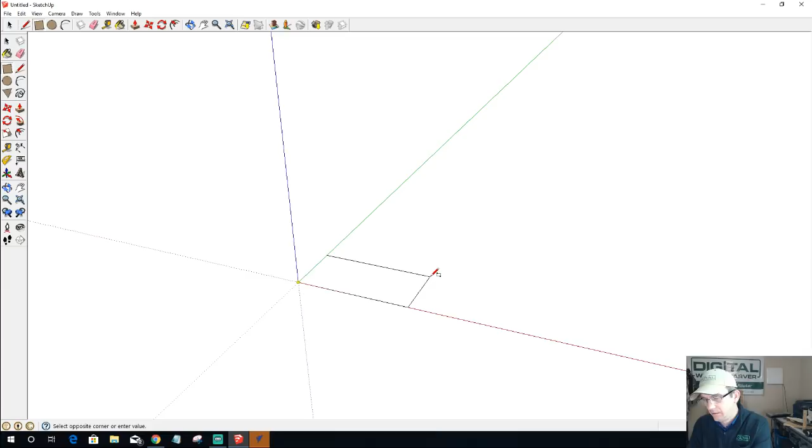So what you see on the screen is basically we've got our X, Y, and Z, our red, green, and blue planes here, and we're drawing kind of in 3-dimension. For this, our serving tray is going to be 24.5 inches by 18 1/4. Let's zoom into that and kind of get here.

Now for the bottom of the serving tray, it depends on what we're going to be doing. Normally it's going to be a thin bottom, 1/4 of an inch or something like that. But if I'm going to be V-carve inlaying in this, or inlaying period, or doing some V carving or design work, then I'm going to want a little bit of material. So I'm going to make this piece 1/2 inch thick - 0.5, enter. Then I'm going to triple click on that and make that a component. Triple click, hit enter, and that's a component now.

Now this bottom part is going to be inserted or rabbited into our sides and our end caps and everything. So let's start off real quick and kind of get the ends laid in or drawn in. I'm going to start with a rectangle here - where's my rectangle at? There it is. For that rectangle, my side piece is most likely, I'm thinking the whole thing is going to be kind of 1/2 inch, so that's going to be my go-to. I'm going to pull that out 0.5, and then pull that up - I think it's going to be 4 inches tall. I'm going to go 4 inches tall.

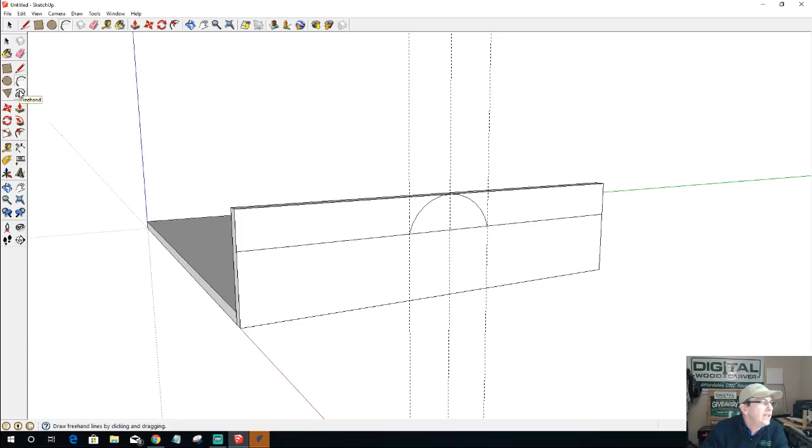Okay, now I'm going to grab my arc tool, and I'm going to make a, let's see here. I'll make a full-on arc there, and then I don't really have a kind of a Bezier curve type thing like we do in Vectric, so let's see if I can.

Let's see how good my freehand skills are. So I'm wanting to come. Whoa, my freehand skills aren't that good. We're not going to do that.

All right, so somewhere right about here, about this tangent and all, I want to have a nice subtle transition. Okay. Excellent.

And I am going to basically... That looks good. All right, yeah, that's going to be a good one there.

So let's see, I don't know why my tape measure tool is giving me a hard time today. All right, so that is 4 7/16. So let's do the same thing here. Let's go 4 7/16, and then from here down, I'm at 3/4.

So let's go ahead and draw that arc in. Let's snap right here, and just a very subtle on the tangent edge, like that. Pretty stuff. Okay, now I can go ahead and get rid of some things.

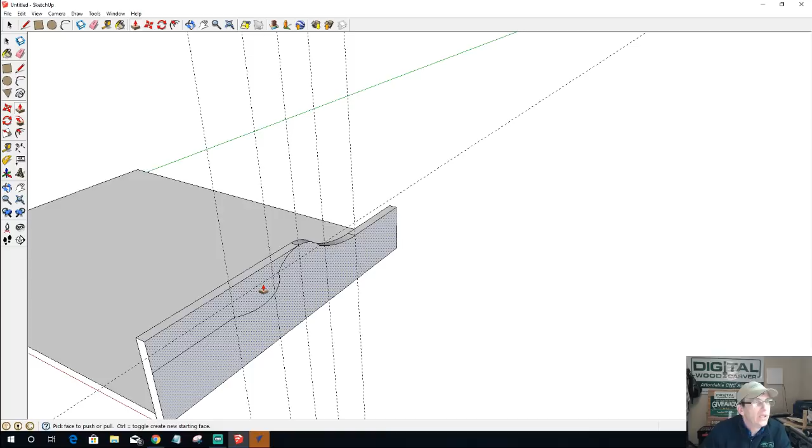Oh, Mr. Push-Pull Tool, don't mess with me now. Ooh, we're getting sexy. Anyway, why isn't my...

Stand by, I got to disconnect somewhere. 1, 2, 3. What's the deal there, Junior? That's why I have a disconnect.

My line, my arc is like way off into funky man's land. What's up with the arcs today, Laney? Why are you drawing off the board? Let me get rid of that. Jeez Louise, let me draw on my board.

Oh, wrong direction. Hold on a second. We're getting somewhere. There we go. Oh, I was just there. Where's my tangent line? Come on, get back in there.

Perfect. All right, now I can use my push-pull tool. Look at that, like a champ. Okay.

Now, let's come in here and what in the heck am I doing? All right, push-pull. Let's pop that hole through.

Let's see, if I go 0.5 enter, bam, poke a hole in there. All right, anyway, this is a rough sketch where it's gonna look much better in the actual Vectric version. I'm just kind of freehanding this right now, doing some, and let's make that a component. And let's take and move that, hold down the control key and drag that to the other side.

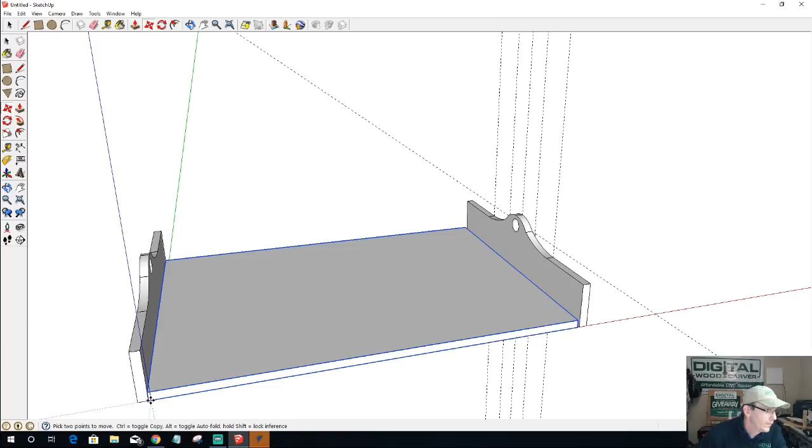Work with me there, Junior. All right, let's go ahead and get the sides on here.

Push pull that out half inch, 0.5. Triple click on that, make that a component. Then move and let's grab the outside here. Hold down the control key and snap that to there.

Okie dokie, now let's go ahead and delete my guides here. So now this has no joinery or anything right now. Right now everything's kind of butt edged up and all that stuff.

This is a typical kind of layout for design, not the handles of course and all that stuff, but this is going to be a layout for our serving tray. This is what we're going with, but we're going to do some compound miters on ours, so we have some flared edges and everything, so they kind of flare out a little bit. We're going to do some regular miters, some rabbet joints, a couple of things depending on the 3 styles.

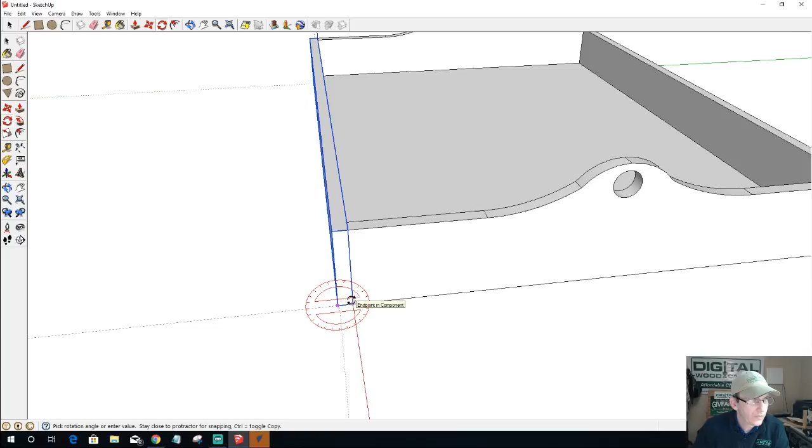What I mean by flaring out is, let's say that I take this guy here and I'm going to rotate him, kind of tilt him out a little bit. Let's go 30 degrees.

And on this old boy here, let's grab him, let's take and hide him for a second. And on this one here, let's kind of flare him out, let's rotate him out. 30 degrees.

That's fine, we'll do 2 sides for right now. So let's move this and let me kind of snap that there. Now I'm going to flip this over and go into the underside here.

We're going to break this up here and do a push pull and just kind of pull this out to here, kind of like that.

And then let's go ahead and get our other side back in. So let's unhide, unhide the last one, let's get him into position. So we'll move him.

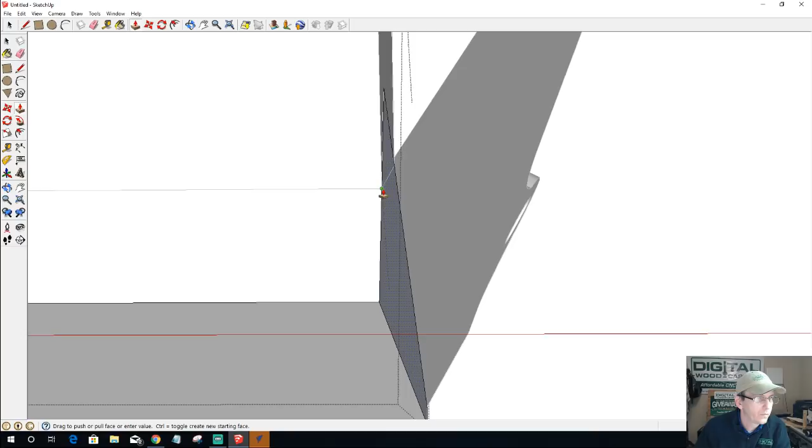This will make sense in a minute. All right, let's take this guy, pull this out. Yeah, I'm crossing these boundaries on purpose because I just don't want to, I'm lazy, I'm being lazy right now. Let's take this guy and pull this out this way.

All right, from there I'm going to take and draw a line right up the middle there, the middle. And let's go ahead and draw that line inside this component also.

All right, let's delete that. Let's delete that, delete that. All right, on this one let's delete that.

Let's take and draw a connection from here to here to here. Stand by, stand by your man. Okay, let's delete this.

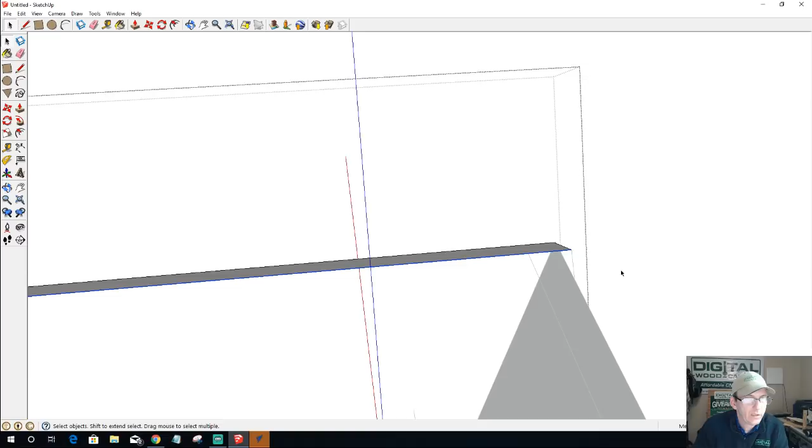Okay, oh, got one more little... That's good. Somebody that draws on SketchUp is gonna look at this and go, what in the world is he thinking? Because this is not how you do it, guys.

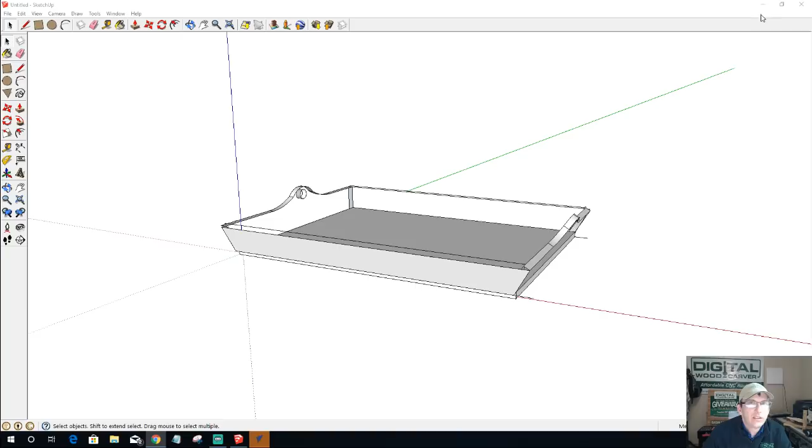All right, let's go ahead - this is not a lesson in how to draw in SketchUp, so we're going to close that. Look at there, I was successfully updated to 9.515. I recommend everybody keep their software up to date, but let's go ahead and create a new file.

Now the base of this work area is going to be 24.5 inches. And for those of you that have the 2440, you're good to go, right, if you're going to go edge to edge and all.

But keep this in mind, ladies and gentlemen, the sides - left, right, front and back - these are going to be 4 inches by 24 and a half inches or what have you. You should be able to get those and size it down within your mini carver. If you have an 18 by 24 inch cutting area, instead of a 24.5 inch serving tray, make it 22.5 or 23 inches or something, get within your size.

As far as the base, the bottom, where we're V-carving, we can kind of focus just on the area that we're carving in. You don't need that whole work area, just size it to fit your needs and your ability, not just necessarily your needs. You may want 24.5, but your CNC can only do 24, so size it for your limits, stay within your limits.

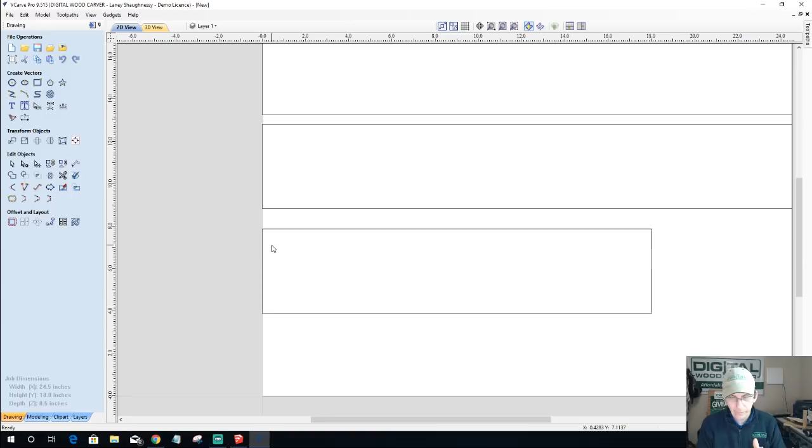Now, I said that my hand, a good comfortable hand hole for me would be about 3 3/4. So let's go ahead and draw a rectangle in here. I'm going to go 3 3/4, 3.75.

And on the thickness, let's see here. What's a good... we'll go 1 and 3. Oh gosh, what? Let's see here. Let's go 1.5. There we go, that'll be good.

All right, so I want to get this little guy - I'm going to have him selected first. I'm going to have the outer rectangle selected last. Go into the alignment tool, the last icon on the transform objects menu, and we're going to align to a selection. A selection means the last object that we selected.

So I'm going to align to a selection, I'm going to center - okay, but not full center, just left and right. I want the handle to be somewhat in this general position here, but centered left to right. So we had a small shift there, now we're centered. Now I'm actually going to go back in there and center it to the inside top edge like that, and then move it down.

I'd like it to be positioned - I'm going to use the move tool with just this selected. And I'd like to relatively move it from its current position down. Up and down is the y-axis, so I want to go negative because we're going down. I'd like to have a good 5/8 or 3/4 inch bit of meat above it. So let's go 0.625, we'll go 5/8.

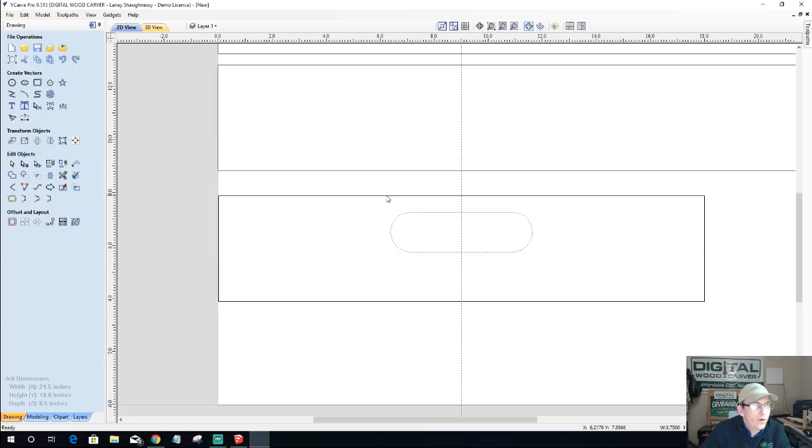And for this, I'm going to have a nice... what do I want to do? I think I'm going to drag a guideline and snap to the center here. From the center to the top, I'm going to have it come all the way out past my handle, maybe about a half inch, before it starts to round off and come down.

So let's drag another guideline. I like using guidelines to help me lay things out. I'm pulling a guideline from the ruler over here, and now I'm going to make a relative guide. Right click on your guide, hover your mouse over it and right click, and your menu comes up.

I'm going to the left, which is a negative direction on the X. I want to go from that edge maybe about a half inch, but I think 5/8 is going to be good, to keep everything consistent. So I'm going to go negative 0.625. Okay, same thing over here, but this time relatively I'm going positive, to the right.

All right, so now I kind of like this arc to be about the same height as the top of my handle hold here. So what I'm most likely going to do is draw a rectangle. I like working from rectangles.

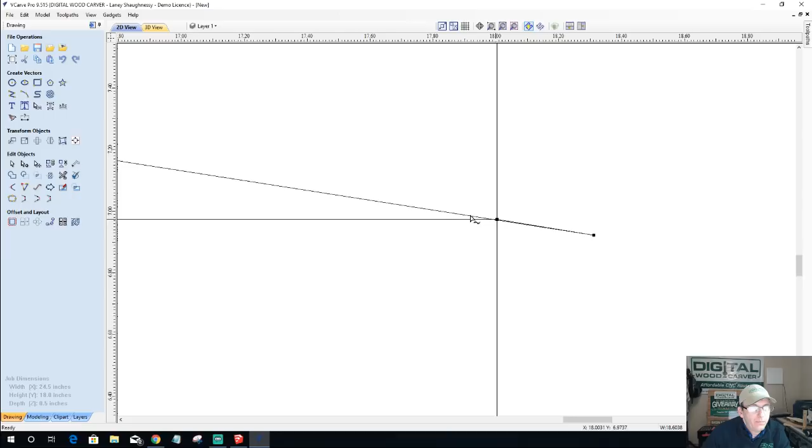This is going to come down. And I went out beyond - I'm crossing over because we're going to end up deleting this. This will make all kinds of sense in a moment. I'm pulling this node out away so that my line can intersect my cross there, because I'm going to end up deleting those points in a moment.

Does that look level and even, right? All right, now let's clean this up. Take my scissor tool and trim that away over there. Take my scissors and trim that away over here.

Okay, now I want these to match. I'd like to have this curvature match, because this line's not going to be here in about 2 seconds - we're going to get rid of this bottom span here in a second.

But first and foremost, on this sharp point right here where I'm kind of coming down, I'm going to fillet. Let's do a fillet, and I'd like a nice large fillet. I'm going to go about 1 1/4. Let's see what a 1 1/4 fillet looks like. You know, kind of like that. That's what a 1 1/4 looks like.

Let's go bigger, go bigger, go home. Let's double that. Let's go 3. Nice transition. All right, let's go over here.

Okay, nice. All right, let's do some trimming. And I'm going to smooth this out too, by the way, up here. We're going to make that a nice little arc here in a moment, but let's do some trimming.

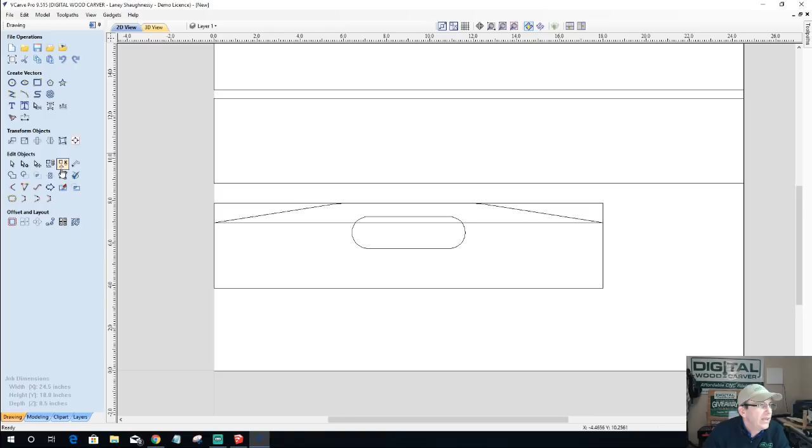Let me get rid of my guides because that's probably driving you nuts, those guidelines. So delete all guides, I don't need them anymore. And let's do some trim - we're going to get rid of that. And on this part here, let's go back into node editing mode.

And on this part here, I'm going to go with an arc, and pull that arc ever so... oh, do I want to go with an arc?

I really do want to go with an arc, but not like that. Let's undo that. I'm going to take these two guys out right here and lower them down. And look what I just discovered - there's a line there. I knew there was something funky going on. Let's trim that up, get rid of that line. Now I'm going to go into node editing because something wasn't right - I knew my nodes for my radiuses weren't there, and I was like, something's going on.

Now let's go, I'm going to select all these and lower them down just a little bit, a little bit softer now. Now I'm going to turn this into an arc - whoa, big old arc, not that big. And we're going to transition to right about here. I want that arc to actually go wider, so I'm going to delete this point and this one as well, and pull that up just ever so slightly.

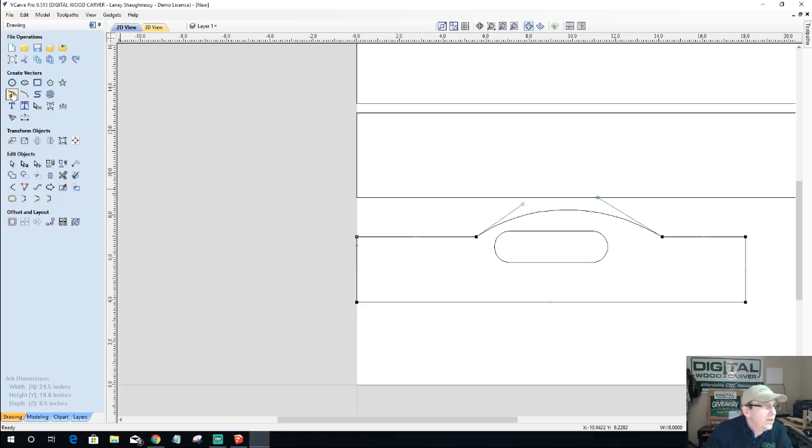Okay, watch me get my center line. Now I got a center line. Grab that center line and snap up to here. What that does for me is, as I'm pulling this where I want and everything, because I want this kind of transition, I can get this center line, and that's going to let me go ahead and trim. And then that's going to let me select this guy right here and mirror him under the Transform Objects menu.

Flip him about job center - no, not about job center, oh I want to just flip him. I want to create a mirror copy and flip him, not vertically, you goofball, horizontally. Nope, not that way either. Flip to the left. Not horizontal, I want to flip them to the left. To the left, to the left.

Okay, now with that we can go ahead and click, click, trim. Click, click, trim. Click, click - oh not that one, zoom in. Click, click, click. Oh man, don't be doing that to me.

When it wants to trim away everything, and no matter how much you try, go back into node editing mode. We'll select these two here, and we're just going to bump them. Where's my lines at?

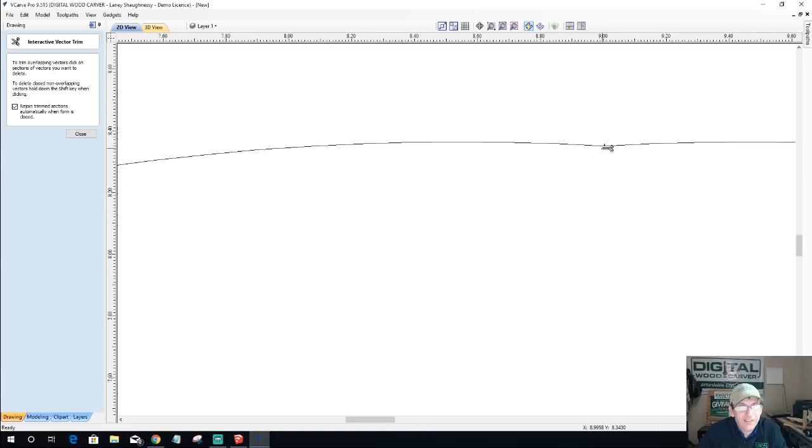Okay, let's go into node editing one more time. Let's click on this - got a little bit of a crisscross happening here. Let's delete that point. And what do we got going on here? Let's delete this node, or that point, sorry. Delete that point, and let's see what that ends up with. There we go, so now I gotta pull this back up after all of that.

After all that mirroring and everything. Oh, pick a side. Let me get one side looking sexy.

Okay, I'm happy with it. We're wasting too much time on that. All right, so with that, that's what my end is going to look like, my handle and everything.

We're not done with that, that's just the first draft. We're going to add some decorative cutouts all the way around on some of these. So first I want to select this, hit Control, and make a copy so we've got our left and right handles.

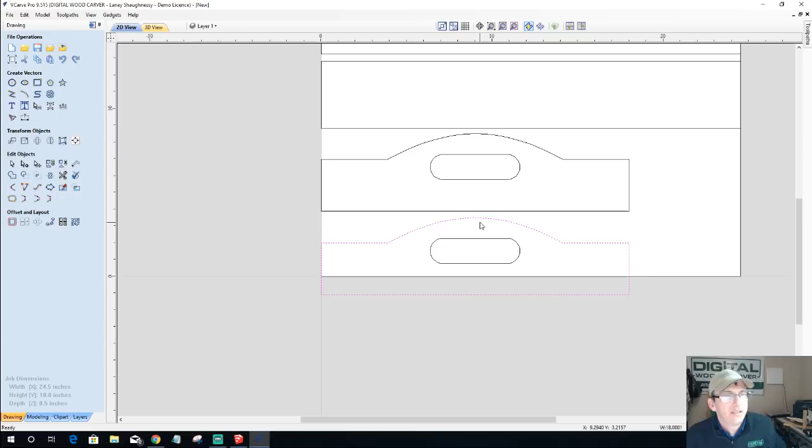Okay, man, all that roundabout stuff just to get a halfway decent looking arch going on there. You just don't want it too thick here, so when you're gripping it with your hands it's not uncomfortable. You want it comfortable, and whatever that comfort level is.

I just bumped it up too. Okay. Now on here, you know, I said in the video description this was going to be a two-sided job.

Here's your choices. One, you can cut the parts out on your CNC, then take them over to a miter saw or table saw and miter cut the ends for a nice mitered corner. You could add miter splines, maybe if I was doing this in a walnut serving tray, I might have maple splines on those miters, because the CNC doesn't take away good old-fashioned sanding and joinery. It's just another tool, so not every single detail has to be done here on the CNC. For me, especially on that compound miter, that would be done on the table saw after cutting the parts out.

So we can miter the edges, or we can do just basic rabbet joints, right? Kind of have the side, the front and back, these two parts here, go right into some rabbets on the side. But whatever you do, just understand you're going to have exposed end grain, and that might be a nice little detail for you. Me personally, I want it closed off, that's why I like the miter look.

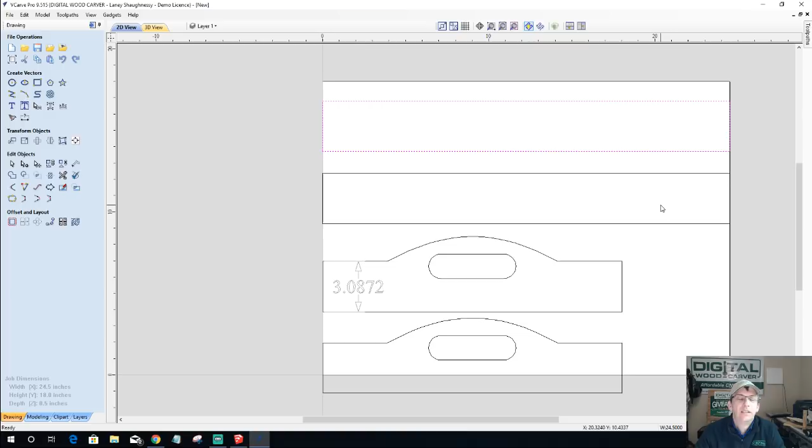Let's use other tools if that's the only way you can go. I will show you how to do that in just a moment. I'm only going to show you one miter - you'll have to do the others. I'm not going to do all 4 sides.

So on these end handles and everything, I would like a nice little detailed V carving, kind of like a little flourish or something, and I would like that to continue all the way around to the side. So we're going to decorate the outside of this first serving tray. From there we're going to change things up and do some decorative stuff on the bottom and all that.

But let's look and see what I've got as far as flourishes and things, if anything I have will fit my needs. Let's take - oh, that one might be a good one. I don't know what that is looking at it right there, but that could be a good one. Got some stuff going on right here. Let's do this one - this one looks floral-y.

So we're going to import a bitmap for tracing.

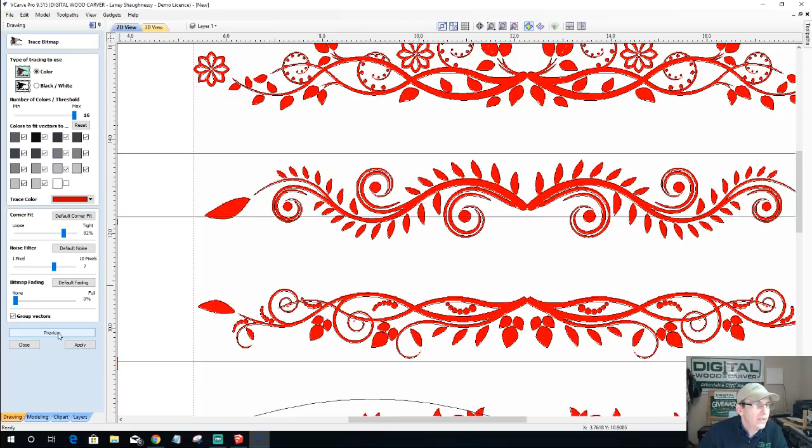But since it's not the best quality image in the world, I do want to crank up my noise filter a bit. I'm going to go probably about 7 on this and preview. There we go. Actually, I can't do that - I've got to turn it down because it's actually skipping some stuff because of the noise. So let's try that again.

Yeah, I'm going back up to 7. I've decided - we're going to go back up to 7, and I'm just not going to trace that. Doesn't need that, don't need that junk in there anyway. All right, we're going to click apply.

Close that tool. We're going to come over here and turn off our bitmap layer. In the layers tab, we have our bitmap layer where our pixeled image is - we're going to turn that light bulb off.

Now we're going to pick one. I'm going to go with these kind of tulip looking flowers right here. So all the rest of these, I'm going to go ahead and ungroup those, select all of these and hit delete. I'm going to select all of this and hit delete. I'm going to select this and group this together.

Oops, let me not select my - ungroup that, my handle was in there. Don't group your handle in there. Let's turn that off and now we'll group that together. By the way, your group tools are under Edit Objects, the 4th and 5th icon, group and ungroup - but also the letter G for group and the letter U for ungroup on your keyboard.

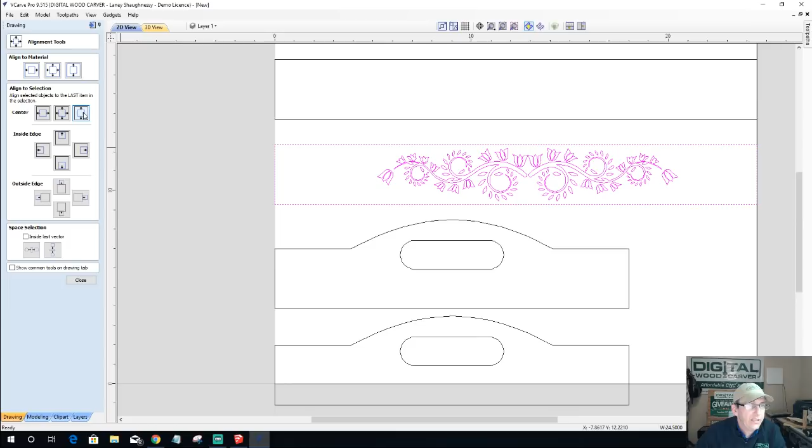I want a little bit of scale there, just not much. I want to leave a little bit of room at the top and the bottom, and I want to make sure it's centered. So I'm going to hold down my shift key, grab that rectangle last, go into my alignment tool, and make sure it's centered up and down. Okay, so it didn't move, so its position is centered and everything.

Now I'm going to turn off that rectangle, and I'm going to use my left arrow key and kind of come in and pick a spot, any spot. But I'm going to be cutting half of this off because I want this to kind of wrap around.

This is very important if I'm going to do this right - when I glue this joint together, I want my flowers to all line up the same. If I know I'm going to be trimming just a hair off when I miter cut this piece, then wherever I want to join, I'm going to overhang it a bit and pick a spot, and that's where I'll bring the other one to. It's hard to explain, but I want this to wrap and be seamless.

So real quick, I'm going to double click on this, hold my control key down, and drag a copy over. Now between the two copies, I want to get my spacing here, and then I'm going to center everything, but I want to get the spacing between these two flowers. These are going to kind of be the center.

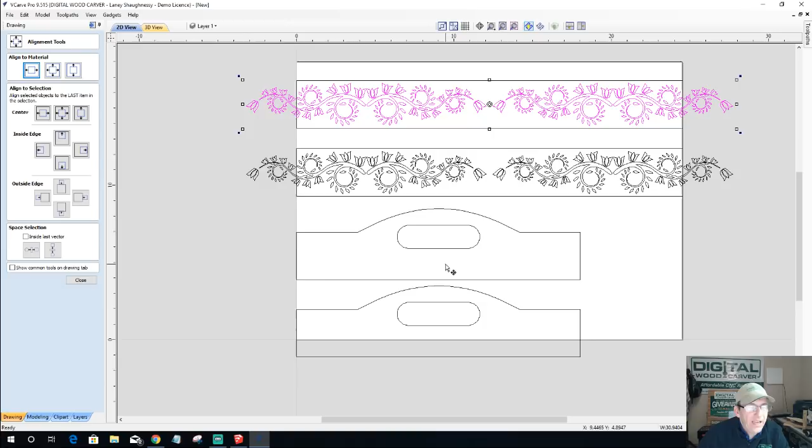On this end, I might have, I don't know, an initial, a monogram, my business logo or something, or 'for more serving trays, call me.' I don't know, but...

This is where I'm going to be drawing the line right here. Now, when I say draw the line, I'm going to be trimming this vector, and I do not want an open vector. I'm going to be cutting this off, and I don't want an open vector. So I would like to very simply trim it to a line, but I don't want to trim my rectangle away - that's not my intent.

So what I'm going to do is make a copy of this to a new layer. This is going to be my flourish trim boundary. You don't have to name it, but I'm spelling it out so you know what it is. And what the heck, we'll make it red.

Okay, now I'm going to take my flourish trim here and here. Might as well do the same thing with this - let's copy this to that same layer, copy to that same layer.

All right, now I'm going to take my 4 flourishes - hold down your shift key when you're selecting more than one item - and I'm going to move them over, move them over to there. That way I can turn off layer 1, and all I have is my flourish trim boundary. Make sure you select on it, and these guys now can get trimmed.

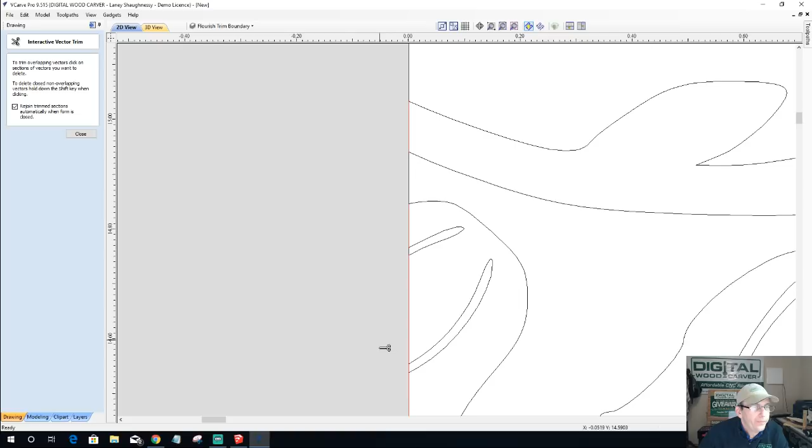This one too, trim. All right. And then over here, we're going to trim that away. Slip slide it away. Right between here, we're going to trim that away. Right in between here, we're going to trim that away. And in between this one, we're going to trim that one away. All right, down here, we're going to trim that away. All right, we're golden.

Okay, sexy. All right, over here, same thing. Let's go ahead and select what we don't need. Oops. Ungroup, got to ungroup it, got to break it up. Select what we don't need here, and this one too. Hit delete. Scissor tool, trim this away. Come on in here and trim. And then right in between, we're going to trim this bottom piece away. Right in the center there. Out here, and on the other side of that stem.

Close that tool. All right, so now what we've done essentially is I can take this here and I can, let's make sure, who left layer 1 on? Turn layer 1 on.

Stand by. Stand by your man.

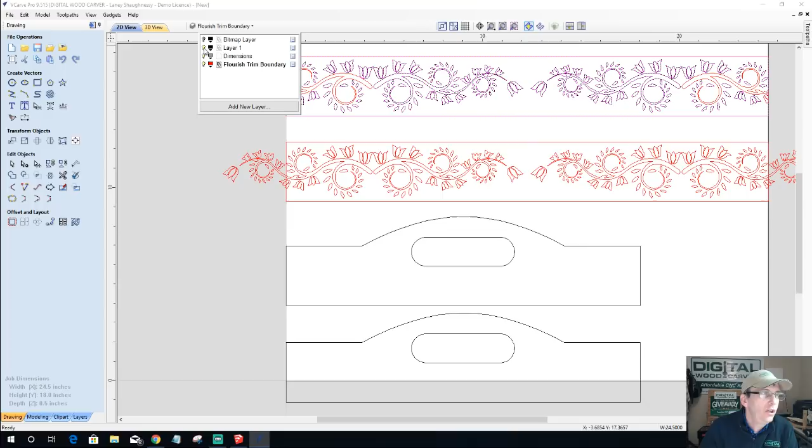Everything that's black here right now, I got to select all of this because some goofball did not have the correct layers on. So I got to turn this off and this off, the red ones, right? The things that were red, that and that. And all of this stuff here, I got to make a copy back to my flourish trim boundary. Then I got to come up here and turn layer 1 off. Dadgummit. Everything should be red. There we go. All right.

So now I can delete this. And I can delete that. Delete that. And I swear if I turn this back on and that rectangle's gone, okay, I was about to say, I was about to get mad. I was like, if that rectangle is gone, I'm going to kick something's butt.

All right, so now I've got my, if I right click on this and select all open vectors, I have none. I do not want any open vectors, that's the goal. Okay, so now this, now that it's trimmed, right, it can go back, it can move back to layer 1 where it belongs. Bam, done.

Okay, all right, same thing here. Let's get this a rocking and a cranking here. Let's go ahead and ungroup it. Let's go with our scissors here. Before we go with our scissors, let's select anything that's on the outside of the boundary that can be selected and delete. Now let's do the same on the other side. That way we're not opening and closing your tools.

Ungroup. Select. We don't want to keep opening and closing tools. We want to try to be proficient. And when we have a tool open, use it, use it everywhere you need to use it.

And we can trim this away. Zoom in. Trim that away. Trim that away. Trim here and above that. Done and done. Come on over to the other side.

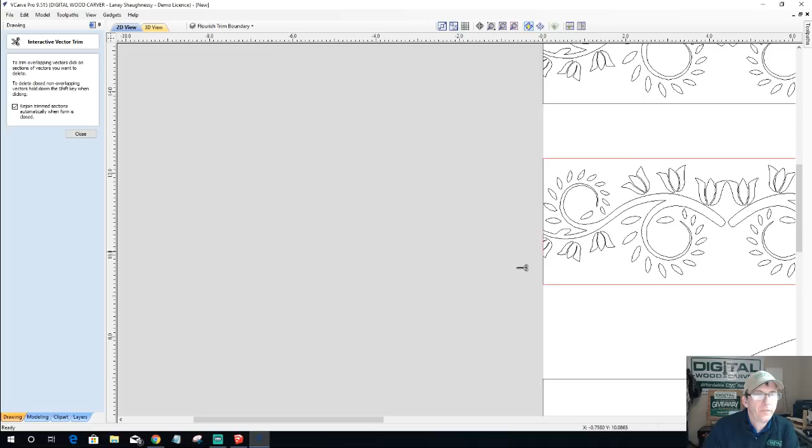Okay, we're going to get rid of this and this. All right, what do we got going on here? We're still good there. All right, so dadgum. Do I have layer 1 on? Layer 1's confusing me right now because it shouldn't be active and all that stuff, but that's okay.

We can turn it off, and these two guys right here, they're cleaned up, no open vectors, right? Select all open vectors. None, they're closed. So we're just going to move them back over. Move to layer 1. All right, so I have nothing left on that flourish trim boundary.

I'm going to go ahead and delete it. I have nothing on my dimensions. Delete it. Turn my layer 1 back on, and there's my two end pieces. Okay, and these guys here, I'm going to go ahead and select them and group them together, right? There's no sense, I should have two items here, my border and the area that I'm going to be V-carving.

So select these and group together. All right, now I want, when these end parts come into here, right, I'd like them to somewhat line up, right? So if I took this guy right here and I grouped him together as one, and this one here as well, and I grouped him together as one, if I took and put them in transform mode and I grab this and snap to there, right? Grab this one and snap to there.

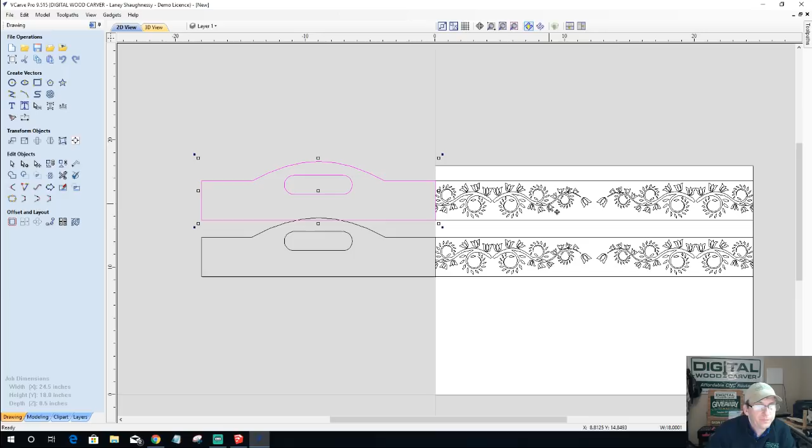I'd like this to take somewhat of that shape, that transitional shape. Now, because everything on the left is on the right, and on the right is on the left, let's go ahead and...

Ungroup this. And once again, I'm working in a different layer, not my original layer, because I'm going to be doing this on both sides. I'm trying to get it to somewhat match. It doesn't have to be perfect because they're not going to be looking at the end and the side at the same time, but hey, let's do what we can.

So we're going to go ahead and make a layer, and this is going to be my side flourishes layer, I'll just call it that. And I want to take my left and right, and I might as well take them all.

And I'm going to copy them - not copy, copy to layer down here. Boy, it's been a long day. I'm going to copy them to that side flourish layer. Now, if I turn layer 1 off, I should have all my flourishes.

Excellent. Now I need to take these two and move them over there to that layer. And turn layer 1 off for a minute, so I should have everything over here.

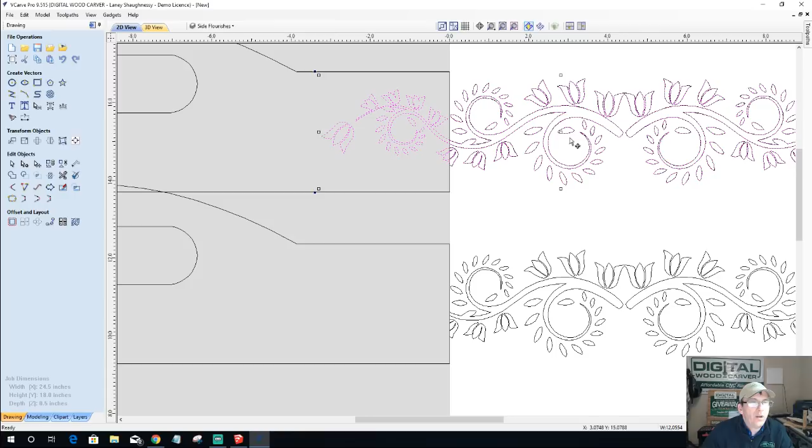All right, now this is about as far as I'm going to go into here. I could, if I wanted to, bring it over more or what have you, but no, that's it. I want it to just barely wrap around. I don't want anything in the middle area here. I just want it to kind of just wrap around, you know what I mean? Just like the vine is just kind of wrapping the sides.

Now I'm going to be trimming and mitering this. And when I go to miter cut this, I'm going to do my best not to shave off too much here on both sides, both pieces. And I am going to lose some, right? I am going to lose some. I might end up losing a little more over here. It's not going to be exactly a perfect cut.

Now, I can account for that by bumping this over ever so much. And then when that area gets cut off, then it's going to end up perfectly where it needs to be for this side. And the same thing over here - I could bump all of this over a little bit, however you want to do it. But I don't want to make this too complicated for you because you're going to take and do whatever design you want to do. But this is what I want right here. This is my go-to.

So with that, we're going to do some trimming. So we're going to first of all deselect everything and only select what's outside of the boundary here and hit delete. This guy right here, he can be deleted, we don't need him. And that, what does that leave me? That only leaves me a few things to clean up over here.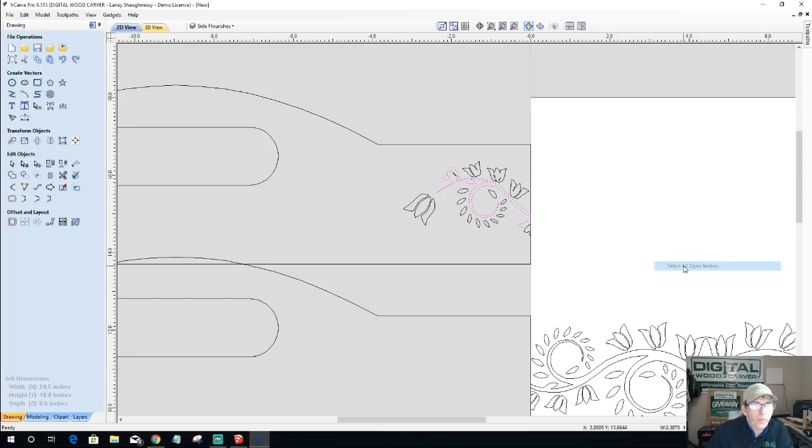But you can't tell that, it's done. So now this guy right here, right? Do I have any open vectors? Select all open vectors. All right, so I still have one open vector, and that's because I didn't trim this line right here, that little space there.

So let's get rid of him. Bam, not all of him, just him. Oh, come on now. All right, when it wants to do that, just go into node editing mode, right? And that's a span between two node points. Bam, delete the span. Okay?

All right, so now that should, let's go over here and let's make sure that we are joined together. That's what our join tool is. So there's still two open vectors, okay? And it's not letting me join. See that? There's no join button here.

So what that means is we're going to take and we're going to move this back to layer 1 for a moment. That way I can see clearly. Right there. When I trimmed, I got rid of the whole line, right?

So I'm going to take this, join with a straight line, close it off. I'm going to take this, join with a straight line, close it off. I should have no open vectors. Okay? So if I go selection, select all open vectors, there should be none. All right, same thing down here.

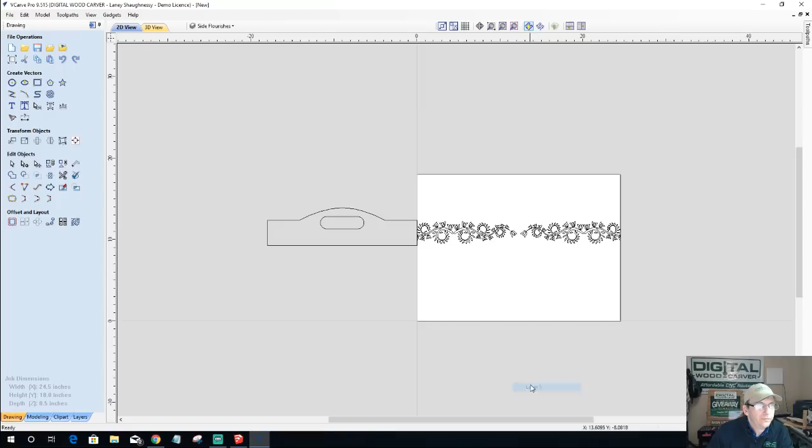And this guy now, he can be moved back to layer 1. Get rid of them. I'm only using this side flourish layer just to help me lay out all of my stuff. So ungroup. Why do these layers keep coming back?

I don't know if I've got a setting to... all right, that one should be done.

This one, I'm going to actually, instead of using the ungroup, I'm going to go ungroup onto groups layer, right now. Not the original layer, groups layer. This layer right here. Okay. That is a big key thing because it was becoming a pain in the butt.

So groups layer means the layer that it's on. The active layer that it's on, that's what we're ungrouping to. And using just the ungroup tool, it was putting it back on the original layer, which was causing us a little bit of a headache.

All right, so let's get this somewhat into position. Again, these are copies, that's why it's identical.

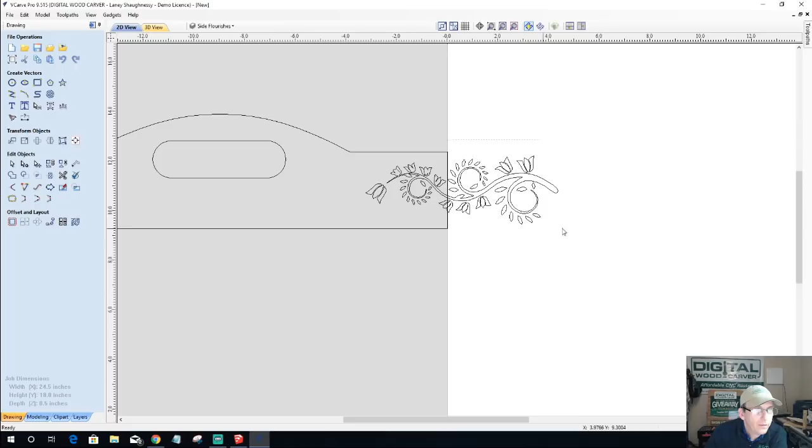Don't give me no sass. All right, I got another object below here. Bear with me a moment. We don't need all that. Don't need all of that. Okay. Trim. Get rid of that.

Get rid of that, that, and that. Now, down here, trim this away. Gone. You can't tell it's gone yet, but it is. Over here, trim.

Here, one click. Here, one click. Up here, one click. All right, so that should have taken this guy right here, and it should have closed him off all the way around, and I should have no open vectors.

Okay, excellent. So now these two guys right here can get moved back to layer 1. I can get rid of this side flourish layer. I'm only using the layers to help me create things.

And now these two parts here, I'll go ahead and group them together for right now, just for a moment. They're going to be ungrouped here in a second. But let's take this one, group all that together, group that together for a minute, and I'm going to just kind of move these up.

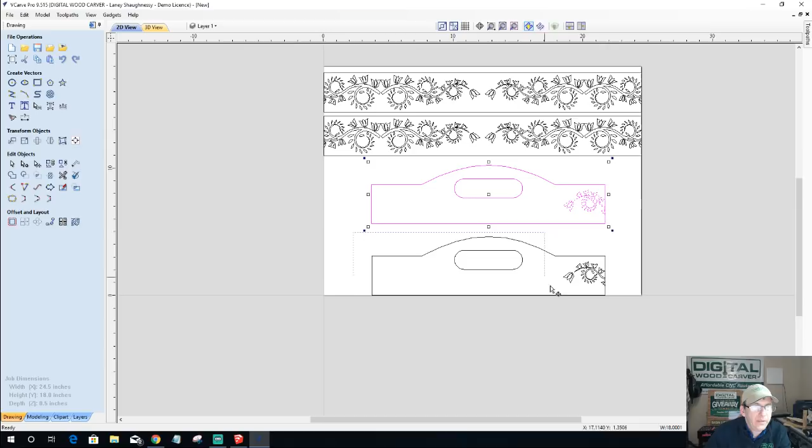And let me take this one. Move that up. Let me take this one. Move that up.

Okay. I am 100% confident that that is, you know, the same on this side, so I'm not going to go through that whole process again. I'm just simply going to take and I'm going to draw a line. I'm going to find the center. Find the center. 90 degrees down.

These two should be centered. If I grab this one and this one... oh, you son of a gun. Group that together, select this and group this together. If I take and select both of these and use my alignment tool and align them side to side, they're even. So that should be my center on both.

Now what I'm going to do very simply is this: I'm going to take and select these two items, group them together, and select that line. Then I'm going to open up my mirror tool and make a mirrored copy and flip it about that line.

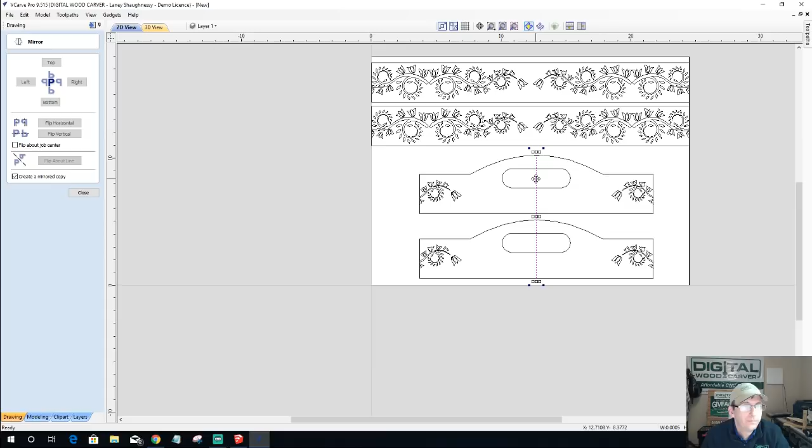All right, so this is going to be my first serving tray, this is going to be the front half. Now you have something to consider, because these do not need to be cut out of a frigging 18-inch wide board, right? We don't have to go try to find some kind of special customized 18-inch board. They're going to most likely get cut out of a...

Let's see what the height of it is. So this one has got a height of 6.5 inches. This here has got a height of 9 5/8, a little over 9 5/8. But let's take this off - that's 18 inches, I've got 24. I'm trying to make it where I don't have to do any tiling and all that stuff. But yeah, we're good - 1 by 12, whatever it may be.

But again, I can select this, let's group. Why are you not selecting? Stand by. Ungroup, ungroup. That's one group right there. I'm grouping these all separately now. These guys here are grouped together, those are grouped together.

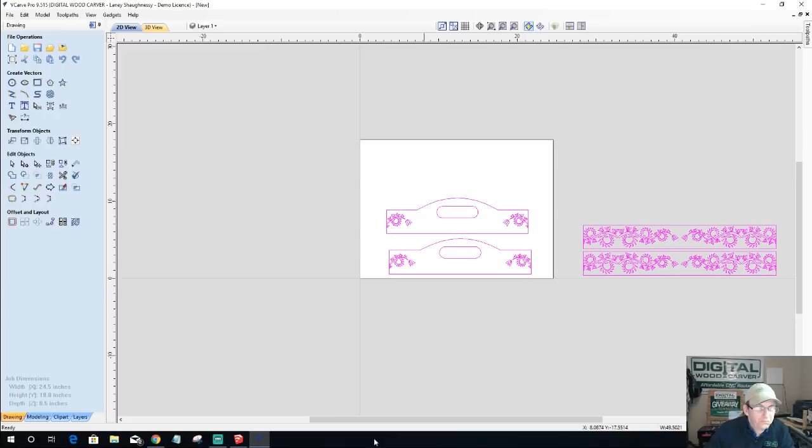But we are going to - I'm going to come in and change my job size up in a moment, but let's take this and this, and let's copy this. I'm going to right click on my Vectric and open up a second instance, and then go into create a new file. This is going to be the board that I'm cutting things out of.

So most likely, if you have a 24-inch cutting area on your mini carver, stay within your cutting area. I have a 40-inch cutting area on my 2440, so I'm most likely going to cut this out of a 36-inch board or something like that. As far as the width, I'll probably take a 1 by 6, which would be 5.5 or 5 1/4 - I think it's 5.25. Somebody let me know if they know off the top of their head.

Now, this board is going to be 1/2 inch thick material, right? So I'm going to be planing it down. If I can't find the material already 1/2 inch thick, then I'm going to mill some of it off. Or I'm going to decide - do I want thicker walls on my serving tray and keep it at 3/4? But I'm going 1/2 inch, so that's what we're doing.

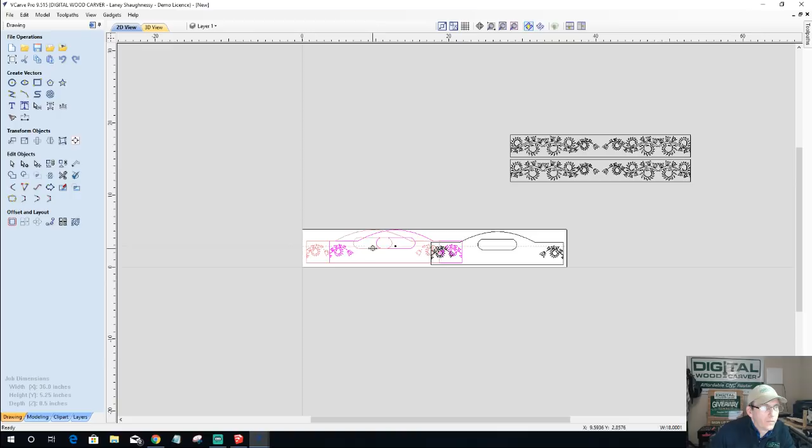Wherever you want to put them, that's all that. Now this is where you got to decide: is this going to be a one-sided job? How are you going to do your joints? Are you miter cutting them? Are you going to do rabbets? What have you? If this was a two-sided job, I'd carve my V-carve on one side, then flip it over and do my rabbet or whatever joint on the back side.

That's a simple pocket cut with a rectangle and stuff. I'm going to be mitering, so remember I told you I'd show you how to do a miter on a part like this, and I'll do that in just 2 seconds. But first and foremost, we're going to make this layer 1.

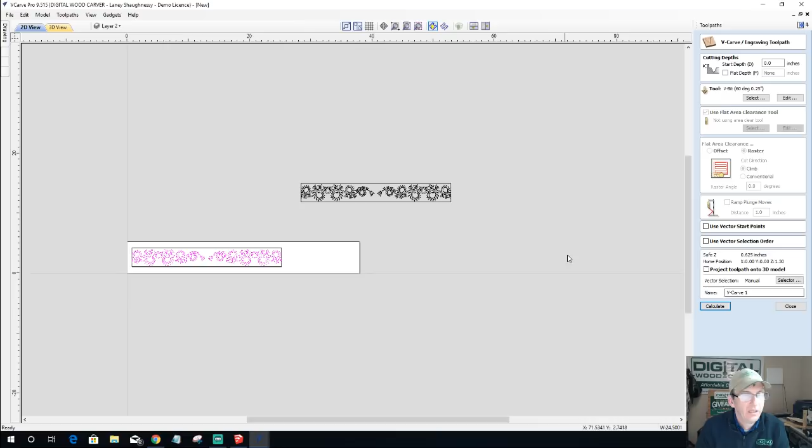All right, let's do a V-carve. I'm going to use a 60 degree. Something like this, 60 degree will probably do okay, but because it is small, a 22.5 degree would probably be a nice bit. I may have to, with it only being 1/2 inch thick, if I use a 22, I'd most likely have to put a flat depth in there. With the 60 degree and this small stuff, I shouldn't have to do that at all.

Now, there's duplicate vectors — they're being ignored. What that means is, if I ungroup this... I don't know why I'm up here. Don't do what I just did. And what I just did was I ungrouped this.

Turn that layer 1 off. Oh, you son of a... Move this back to layer 2. Always make sure your layer is active when you're working in it, man. That's my biggest thing that I do — I always forget sometimes, and it throws me off.

All right, calculate this — this is going to be left side, right side, or front, back. Now you see those duplicate vectors. What that's saying is that within my design, I have vectors on top of vectors, identical duplicates. We don't want duplicate vectors, and the reason I have duplicates is because of all that grouping and ungrouping, and not being on the right layer — that caused it. So I'm simply going to right click, select all of my duplicates, all of them, and hit delete. Done.

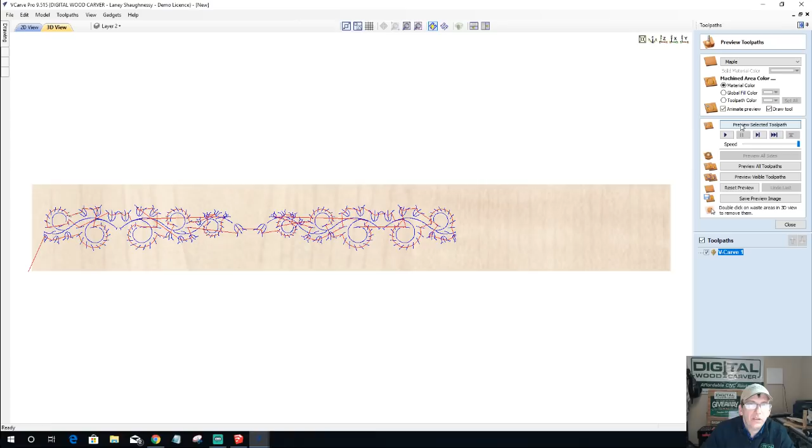So now I can V-carve. All right, if we preview this selected toolpath, I have a nice little floral pattern. I'm in my simulation here, at very high, so this is about a 98% representation. If we look at some of these shallow areas, still carving about 3/8 of an inch deep, you can see that at the bottom right of the screen. If I move my mouse in the cut, 0.37, 0.375 — 3/8 of an inch deep.

So there's some depth in there — that's going to be good detail, not too shallow and faint. I'm at 0.4, I've got some depth to these vines, so those will be nice detail. Remember, this is going to get mitered and cut off for this piece, and I most likely wouldn't be cutting it out of a long board like that — I'd cut it out of something more appropriate sized. And hell, I might even just cut my boards and miter them down beforehand, and then carve those parts on. You never know, but nevertheless, that would be one.

And then we'll have a profile cut, right? This piece would get a profile toolpath, each of these pieces. So we'll do all the way through 0.5 using a 1/4 inch end mill.

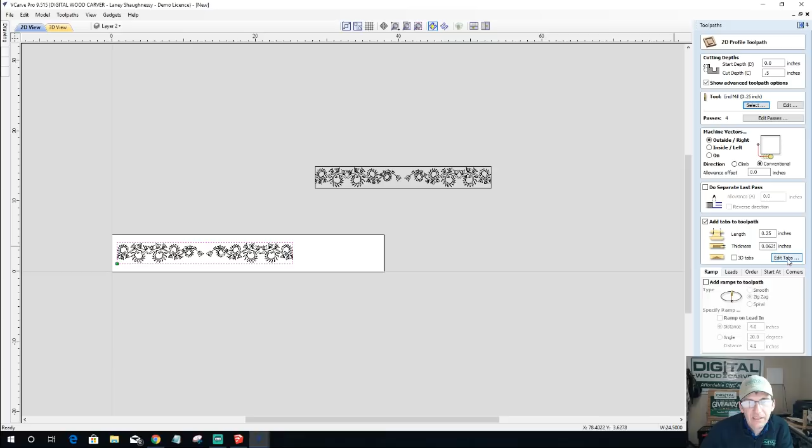Now, most likely you're going to want a couple of tabs to hold that part in, unless you're using something like double-sided tape or what have you. In my case, I'll add a couple of tabs. They're going to be a quarter inch wide, about a sixteenth of an inch thick, not very thick at all.

And we'll just throw one here on this end that's getting mitered, and one here. And we'll calculate that, preview that toolpath. Right, we have those little tabs holding it in. That would be one of our side pieces and everything.

Now here's the thing, my bottom, right? The bottom of my tray. I want the bottom of my tray going in here. How is it going to connect? I would like to rabbet this on the back side for the bottom of my tray to assemble into. So me personally, I would do a 2-sided job on this, or I'm going to do my rabbet cut on the table saw when I do my miter cuts and stuff. But if we don't have a table saw, we've got to know how to do this. So I am going to take the time and switch this over to a 2-sided job.

And I will be flipping this board along the Y-axis, and I will be touching off on my machine bed for both sides. My Z-zero position, I'll be touching off on my wasteboard. So I'm going to click OK.

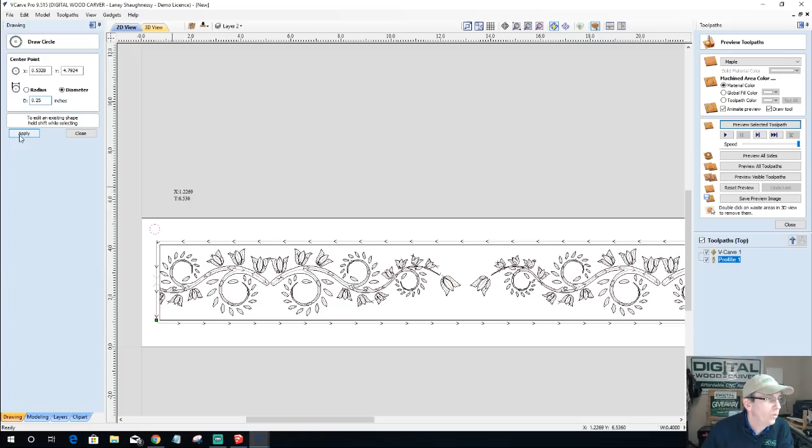Now for this, I'm going to be flipping it over. Let me make some alignment holes. So I'm going to take and make a quarter inch diameter hole in no particular place, just in the waste area somewhere. We'll throw one there, and then somewhere over here, doesn't have to be symmetrical. We're going to go 0.25 - that's where my alignment pins are going to be.

Okay, so let's create a toolpath for that.

Now, a drilling operation with a quarter inch hole - depending on your CNC, there may be a little bit of deflection, and your quarter inch hole might end up loose. That's because when that end mill, not a drill bit, takes its first bite going in, it gets a little bit of wobble, it deflects. If you want a really nice tight hole, instead of a drilling operation, do a pocket cut with an undersized bit, like a 3/16 inch end mill or 1/8 inch, to get that perfect pocket cut.

In my case, I'm not too worried about deflection or anything like that, so I'm going to do a drilling operation, and I'm going to be cutting 0.3 inches deep, not all the way through, just partially. Let's select both of my alignment holes.

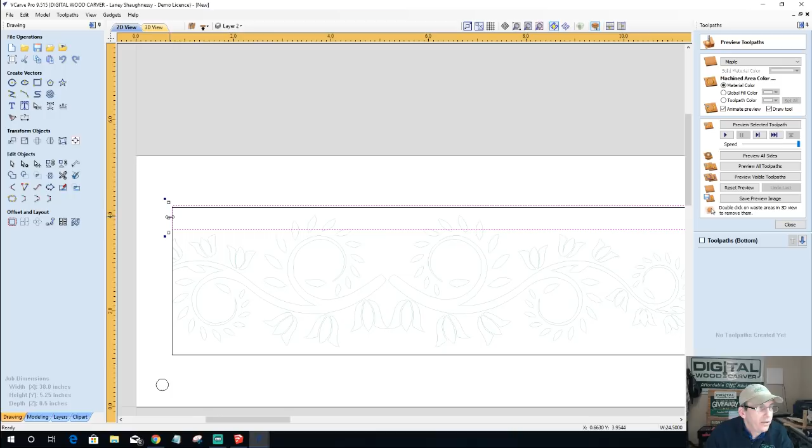Now I want my rabbet to be nice and clean, so I'm going to make it longer than my piece is. I want that bit to have to go past. Even here, notice how I'm not right there on that edge, I'm a little past it. So that 1/2 inch is actually going to be like a 0.625.

Let's do it this way so you understand what's happening here. On this 1/2 inch, the position where it should be, I'm going to take this side here and pull it just past the board a little bit. My bit's going to be pocketing this out, and I want a nice, clean, flat rabbet. I don't want little curves where the radius of my bit is. If I don't let it go past, I'll have a curve I'll have to clean up with a chisel or a razor knife. Same thing here, I don't want a little lip or fuzzies on the end.

So this is going to be a pocket toolpath. It's going to go 1/4 inch deep, and I'm going to be using that same 1/4 inch end mill. If we were doing rabbets for joinery we would put a little rabbet here on each end as well, but again I'm mitering, so I don't want to. So we're going to calculate that.

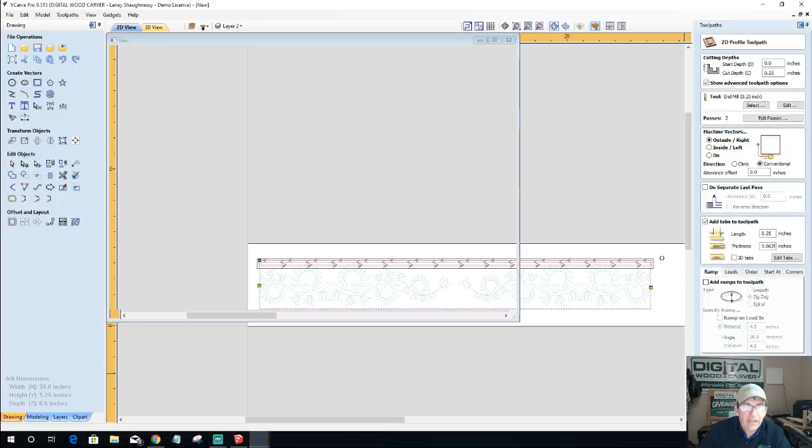Okay, now the first thing that's going to happen, these two guys right here, and I don't know why I always make my alignment holes last, but let's drill this. This time I'm only going 1/4 inch deep inside of my waste board, and I'm going to peck. These are going to be my waste board alignment holes. We'll answer questions before we move on to the next design, so let's preview that. That's going to be the very first thing, so let's do this in order.

So we've got a blank board here. We're going to do a V-carve cut first, and that cut is going to do my V-carve design. I'm going to change out my bit to my 1/4 inch end mill, and it's going to do the alignment holes and the profile cut halfway through. So that's going to be that job, or that half. Then we're going to flip the board over, and notice how it's already cut on the other side because I didn't reset the preview.

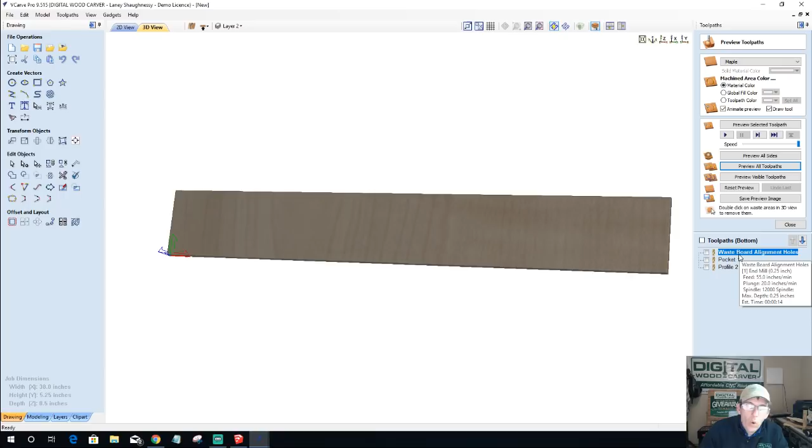What do you think is going to happen when I go to carve this? What's going to happen is that bit is going to raise up from 0, 1/2 inch up, and it's going to come down and drill 1/4 inch. I don't have a board there, I'm carving on my waste board. So it's going to drill air, nothing, right?

So on my wasteboard alignment holes, because my wasteboard is 0, and when I drew these holes and created the toolpath on top of this board, I have to start at 1/2 inch, the thickness of my material, and drill 1/4 of an inch for my wasteboard holes. Yep, 0.75, because it's going to raise up. It's going to drill air, because there's not going to be a board there, down to a 1/2 inch, and then it's going to go 1/4.

Well, it's going to just start at the bottom of this board basically and carve that 1/4 inch deep. So we got to start, or else it's going to carve air, and you're going to be like, dude, I'm carving air. What's up with that? Why is it carving air? I don't understand. I got to call Laney. Well, that's because your board's not there, you're carving on your wasteboard.

All right, so we're going to drill those holes first. Bam. Okay, in the wasteboard. And then we've got our pocket cut and our profile cut.

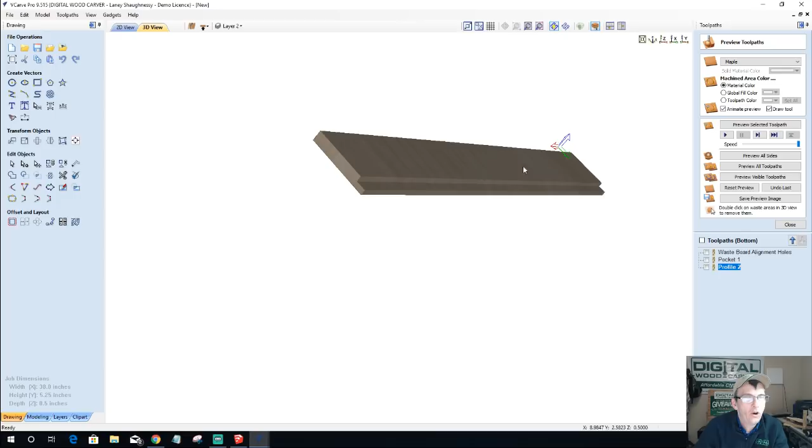So we've got our side piece here, and it's got the rabbet on the bottom side, so that when the 4 pieces, the 2 sides, the front and the back, get mitered and glued together, we have a rabbet for our bottom of our tray to be glued into. All right, so that's what one of our sides would look like with this little decorative flourish thing, and it could be whatever design you want. I just happened to grab what I had.

Debbie says, could you have just used the part you trimmed away and moved it to the end piece instead of deleting it and moving the piece over? Sure, I could have. I could have done the nodes. What Debbie's saying is, on the part, let me flip back over to the top side here. On the original part, when I trimmed that overhang off here, when I trimmed all this away, couldn't I have just taken that and moved it over to my end pieces, since I was doing that anyway?

Absolutely, I could have come over here and gone into node editing. I could have cut the vector here and here and all these places, and taken that whole thing, and moved it over to the front and back. Absolutely, without a doubt, sure could have. But, me being me, I'm going to do it the long way. But yes, Debbie, you absolutely could have.

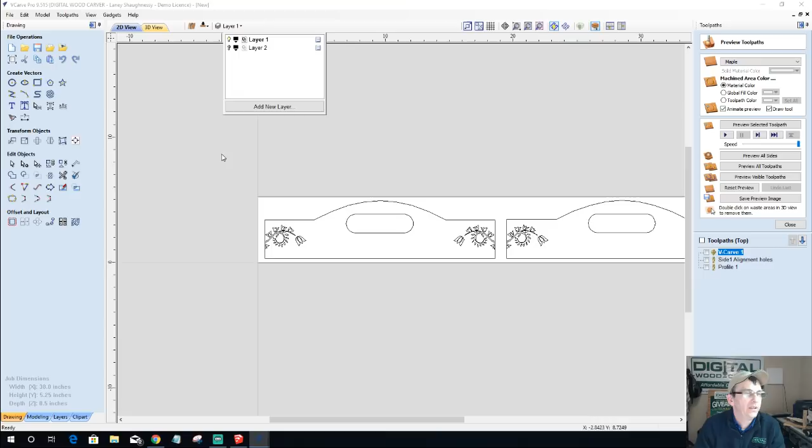All right, so now let's turn off layer 2, and let's go there with layer 1. All right, for layer 1, we've got a, let's ungroup this. Oh geez, hold on a second. Make sure the layer that you're working in is active, very important. Okay, turn off layer 2. All right, I'm going to ungroup this, this one too. All right, so on this one, same thing.

These guys here. And what Debbie's saying is, hey, that part you cut off, couldn't you just take it and moved it over to here?

Yes, absolutely. All right, so on this, we do our V-Carve toolpath. This is going to be the V-Carve sides V-Carve, right? We'll just call it that. And calculate that. 40 duplicate vectors.

That's those duplicate vectors. And by the way, how you see a duplicate vector is if I select on this, you're not seeing any, you're seeing that white dotted line, right? Nothing behind it, nothing but net. So if it's saying that I have duplicate vectors, where are they at? Well, look at these guys over here, see how it's a black line behind the pink? That means there's a vector behind there. So what do we do? We right click, select all duplicate vectors, and just hit the delete key. Done.

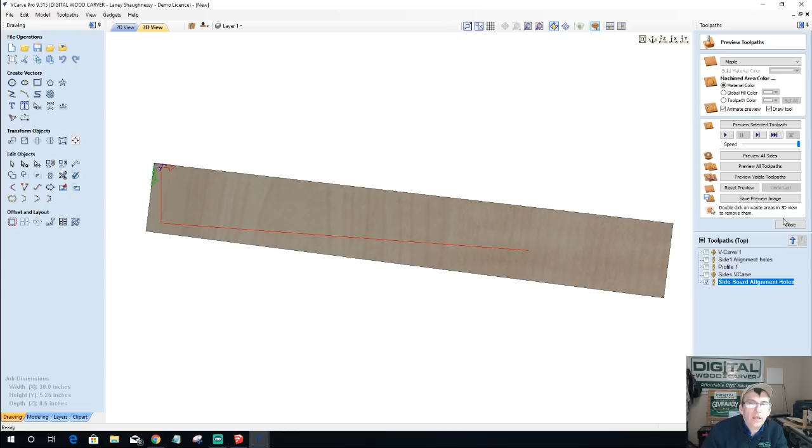And then I'm going to go right here. All right, they don't have to be anywhere special. So these two guys here, these two holes, that's going to be a drilling toolpath for me, 1/4 inch, let's go 0.3. This is on the top of the board. And this is going to be my sides, right, sideboard alignment holes. All right, that'll be the first one that gets done on that.

Well, no, let's move it down. We'll do the V-Carve first, then the alignment holes, because we're going to be doing end mill pocket cuts and profile cuts and all that stuff next. All right.

So now we've got, let's ungroup this. All right, so we've got two holes here, or two profile cuts, should I say. So we're going to take and select all of these, and we're going to do a profile toolpath. I'm going to only go halfway through because it's going to be a two-sided job. I've got to cut my rabbet on the bottom of these, you know. So I'm just going to go halfway through.

So end mill on the outside of the line. We're going to add tabs, right, just like we did before. And since these ends are getting mitered, I'm going to throw a tab here, here, here, and here. I will probably put a tab here and here and here, somewhere in there. And let's call it a day with that and click calculate.

All right, it's saying that the selected vectors contain a group of open contours. This will be cut as individual contours and not as a singular contour. So let's find out what is happening here. If I were to select all open vectors, my outside profile is open. The reason why it's open is because when I was making my arch and stuff, I didn't close it very well. So I'm going to go to the join, and I have two open. So if I just click join, it'll have two closed, so that'll close up.

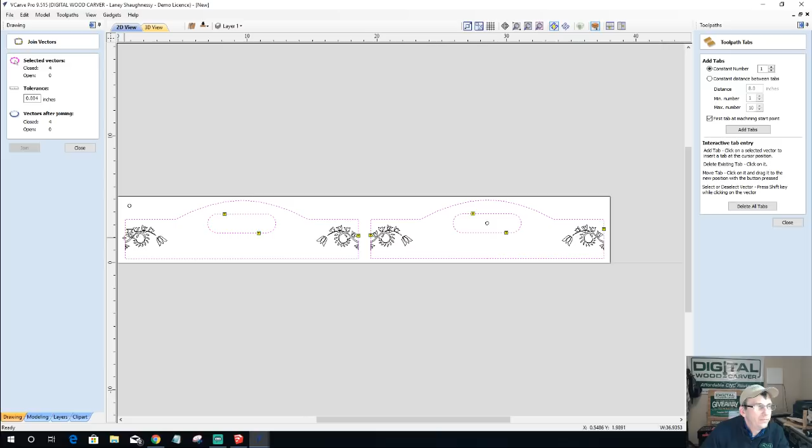Same thing over here, I've got 1 and 1, so they're closed already. Let's select this, make sure there's nothing there. 2 and 2, 1 and 1, 2 and 2. Good. So let's select them one more time and edit my tabs, and calculate.

All right, now the software is smart enough to know that I'm cutting on the outside of the line for the outside vectors. But for the inside vectors, I'm cutting on the inside of the line, so it'll automatically reverse it. It's smart enough to realize that. And if you're going to put an alignment pin in the middle of a handle hole, make sure your bit's not going to hit it, right? And I got plenty of room for it to cut. All right, so we've got that. So we'll preview that toolpath.

Okay, all right, now we're going to come back over and I need to take, while I have these selected, I need to take and make a copy to the other side. Same thing with my alignment holes, make a copy to the other side. And guys, the reason why the alignment holes are where they are is just any open space, but these are alignment holes, not clamping. They're not used for clamping, they're just to get everything in alignment. You still use your mechanical clamps to hold the part down.

So now on the other side, all right, we've got our parts here. I've got to put my rabbets in. And so I'm going to just take and draw a rectangle. Not there, I clicked to the wrong place. Hold on a second. Right there is where I want to snap to.

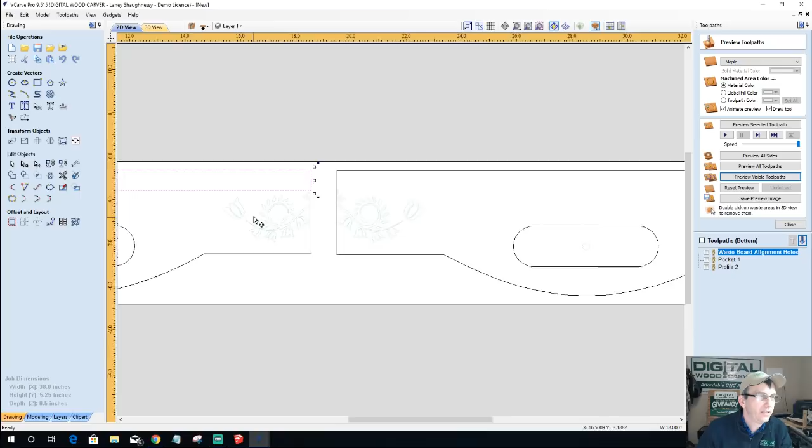All right, on this end, I want to just come past a little bit. Notice how my line is on this line here, but as I come over here, this one's not. So that little stretch in that rectangle all the way across is not going to work for me here.

So I've got to just do one at a time, which is fine. Again, just so the bit can go past and not leave a nice flat spot. All right, I'm going to hold down my control key and just drag a copy over to this one.

Now, my height on this, my size, is very important. Very, very important. It's going to be 0.5 inches - oh geez, don't do that. Unlink the XY, half inch.

Half inch rabbet. Okay, this guy wasn't a half inch, I bet you, dadgummit. Let's see here, let's go right there. He was 3/4. I don't want that 3/4, I want that half inch. 0.5.

Been a bad day if I'd have done that. I'd have been mad. All right, so half inch, just a little bit of overhang on this side.

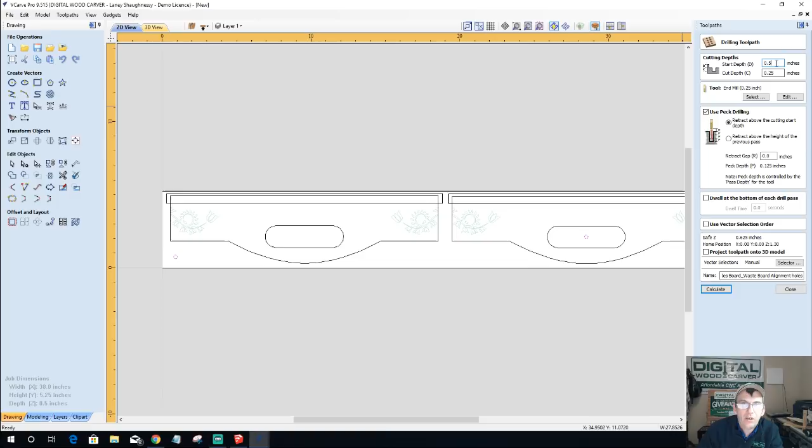So we'll calculate that. And then finally, we will take our rabbets here - that'll be a pocket cut, 1/4 inch deep. And then finally, our profile toolpath, 1/4 inch deep outside. Add tabs.

The tabs will pop up automatically because these were copied from the other side after the toolpath was created on the other side. So we'll click calculate on that. And for this, I will turn off the tabs so we can see the cut. Same thing with the other side, let me turn off the tabs.

All right, let's preview those visible toolpaths on this side. Done and done. Flip the board. These visible toolpaths on this side - the drill hole, alignment hole, pocket cut, profiles.

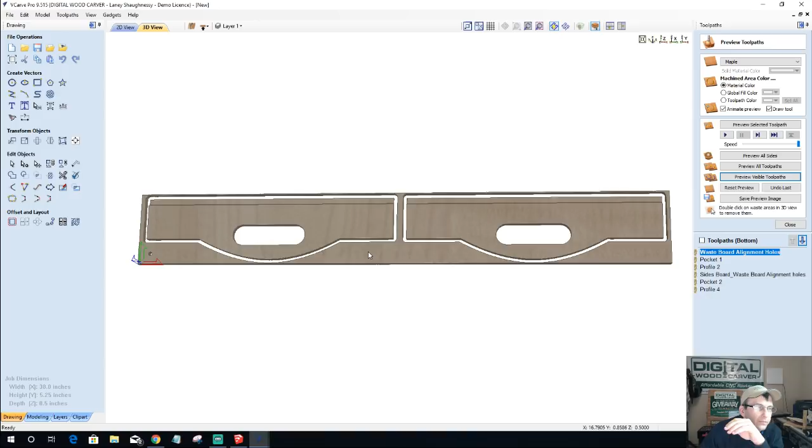All right, then I can get rid of my waste. Okay, and I got my two sides. Now this is a very simple serving tray. The sides get mitered, glued together, bottom goes in.

Speaking of bottom, rock bottom, let's go ahead, and what I'm going to do on these here is export the DXF in case anybody wants those DXF files. I'm going to export this out as a serving tray.

Okay, all right, once I've done that, now I can go ahead and delete those. All right, the bottom - we gotta do some decorating and stuff on the bottom. Now keep this in mind: if I draw this box here, this rectangle, if I outline my boundary here and I offset that inward, offset that inward 1/4 inch with square corners all the way around, this is where my side pieces are going to be, where my board is going to be covered.

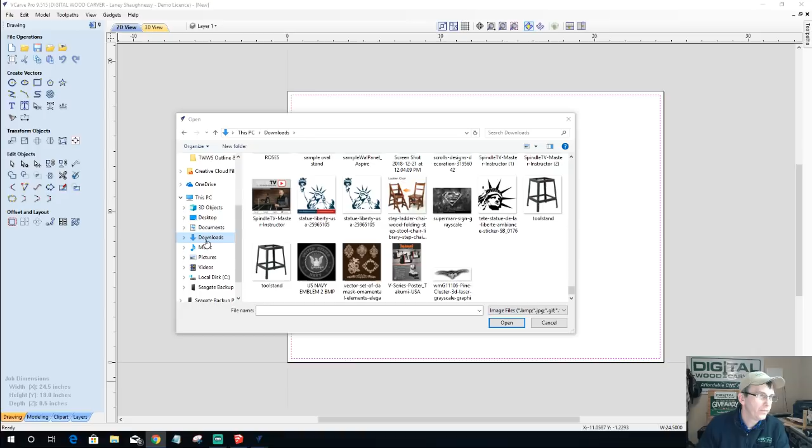Oh, that would actually make a nice intarsia piece or inlay. So we'll grab that, save image. We'll grab it in just a minute. All right, that went into downloads, and it was called Decorative.

All right, show in folder. Come on now. All right, that went into desktop like a goofball. Why did it go into desktop? Okay, it went into my desktop. There we go. All right, let's go ahead and trace this out.

Let's turn the fading off. Gonna start selecting all of these colors. Once again, I could use the slider bar black and white trace option, but when it's late in the evening and your eyes are tired, it's best to just fill in, right? So I know everything is getting selected there. Turn my noise filter up just a little bit and preview, apply, close. All right, turn off the bitmap layer, ungroup the image, select and delete.

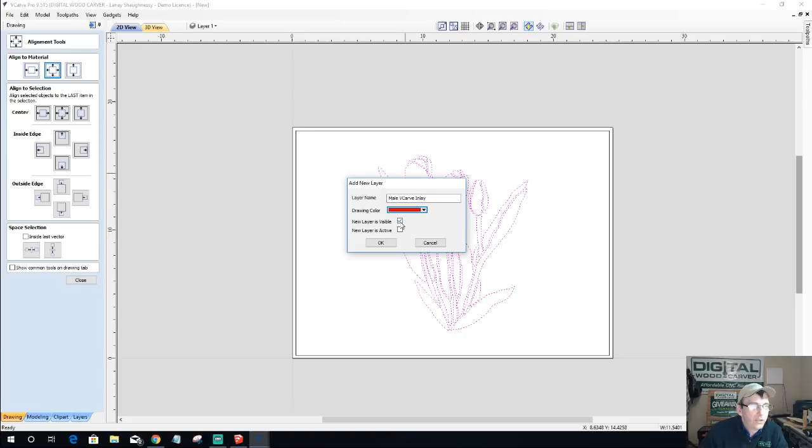Not this one, but another one. All right, so we're going to turn it off for right now. Okay, so we're going to make a copy, and then we'll deal with that copy in a moment. But over here, we're going to come over and we're going to do a V-carve toolpath.

Start depth. Okay, start depth. This is the female pocket. The start depth is going to be 0. My flat depth - now my V-bit, my 60-degree V-bit, only has a 0.2 cutting flute. Okay, 0.2 inches cutting flute. So I'm not going to go beyond that. All right, so most likely 0.2 is going to be my depth of cut maximum. All right, now 60-degree V-bit.

No flat area clearance tool necessary, but it might make things a little quicker than my V-bit trying to flatten all this out. So let's go ahead and use what we got. I'll use a little 1/8 inch end mill and calculate.

I'm going to offset this one. I'm going to let it run offset instead of raster. So calculate, because it's going to get filled in. I'm not worried about carving with the grain and everything and all that stuff. So we're going to preview that cut.

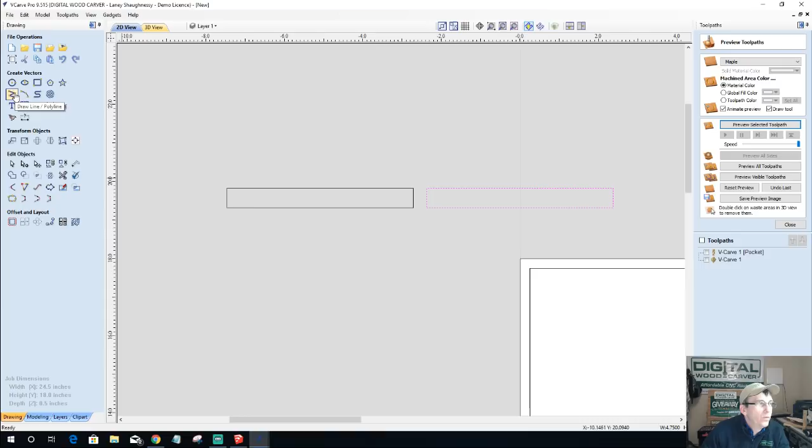All right, let's see if we can illustrate this. We got two boards, right? Male, female. Now, female is going to be cut down. The male is going to be raised up, whatever the design is, right? It's going to be raised up, whatever it may be.

Okay, now the female, on the other hand, let me mirror this. Oops, I don't want to make a mirror copy. Female, on the other hand, is going to be carved in, right? Now, of course, it's carving through the wood, we don't want that, but anyway, you get the idea.

So now this bad boy right here, that male, he's going to get flipped over. Stand by, I got a drunken part here.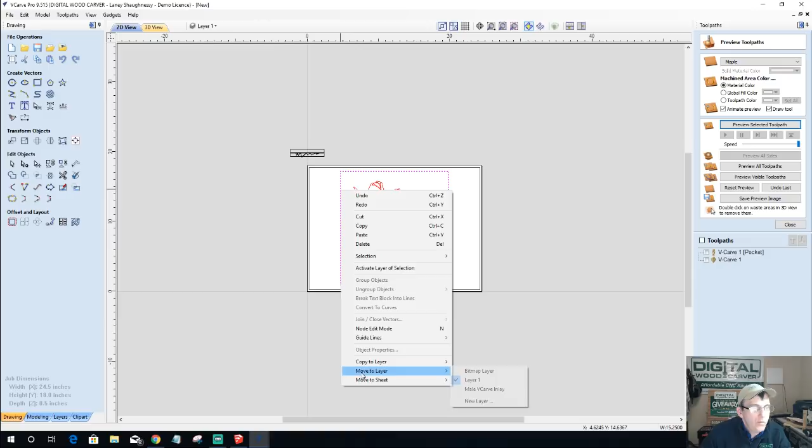So what that means is that my design here, and let's turn off layer 1 for a minute. Stand by there, Junior. Move to male layer. Always make sure your layer is active when you're working in it. I say that all the time because it's me reminding myself.

All right, so since it's got to be mirrored, right, we've got to mirror this, we got to flip it. We're not going to make a copy. We're not, you could do it about job center, right, because we're in the center. So we'll flip it horizontally.

Okay, now when we do the V-carve on this, both of these are going to get selected. And when we do the V-carve toolpath, 0.2 was our goal, right, that's what we cut to. So for this you normally would go like a 0.1 and 0.1, blah blah blah, but well, we're going to get a big glue gap in there if we do that. So I'm going to go with a 0.17 with a cut depth of 0.03. All right, this is going to be 0.17 plus 0.03 equals 0.20. Okay, our goal and everything.

And by having a greater start depth and a smaller flat depth, that's going to reduce my glue gap. That's going to reduce the space in between my, that air gap space between my male and female and everything, so I get a nice better fit. And you know, if I did want to do some additional stuff with it, I'm not going to have these big voids in my inlay and everything.

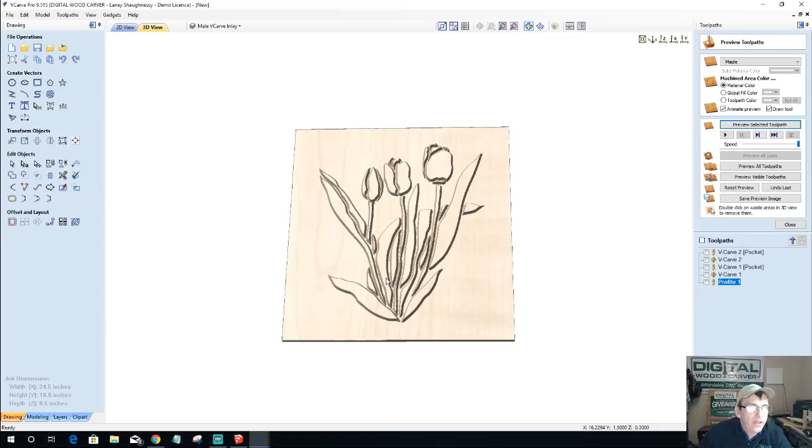All right, so we end up with a piece like this, and this piece is going to get laid over. It's going to get glued and laid over and pressed into that female pocket. And then when it's all said and done, we could even take the whole tray back over to our CNC and mill off the top surface, right, to where our inlay is filled and everything. And, you know, Bob's your uncle, do some sanding and all that stuff. But...

Yeah, so let's take a look at what this would look like if we preview the visible toolpath there. V-Carve Inlay - if you haven't done a V-Carve Inlay yet, you need to do one, you need to do one. Have some fun with it and, you know, play around. Let's see here.

Got to use your imagination. Imagine that's the inlay, or something, whatever. But that would make for a nice contrasting middle of that tray, with our two end pieces on the edges with that same kind of tulip flower and vine all the way around. That would be a very basic serving tray for you.

Okay. Yes. All right.

Miner Mike asks a great question. Everybody gets a little confused. How are those alignment holes going to work if we flip the piece to cut the back side?

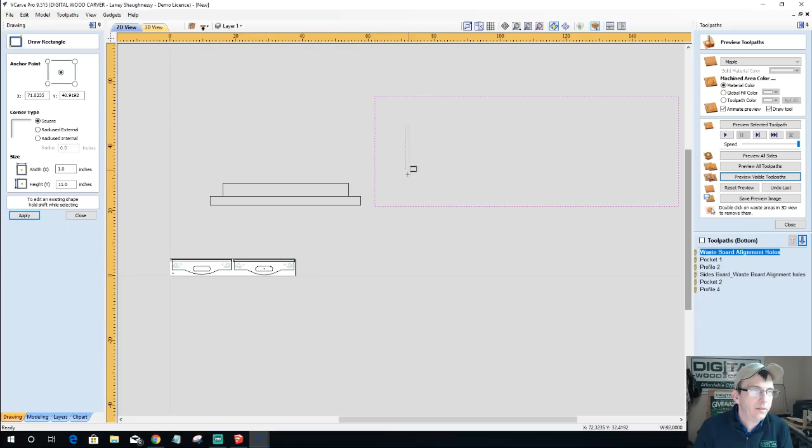So this is our table. This is our project board. Let's look down and draw three different views here. This is looking down straight on along the y-axis. And let's get an overhead view. Let's say this is my waste board and this is my project board here.

Now, my first set of holes on the top of my board are going to get cut into my project board on one end or the other, about 0.3 inches deep.

So that'll be simulated by that hole there and that hole there. Now, when I mirror those holes to the other side of my board, it automatically, depending on how I'm flipping the board, puts them in the correct position.

It mirrors them. So if I were to take and mirror this, let me make a copy of them first. Let me close this for a minute. Control C for copy, Control V for paste. There we go. Let me mirror this, and I'm going to flip them

horizontally. Let's not flip about job center, let's just flip them horizontally. All right, now let's take this one and this one and group those together.

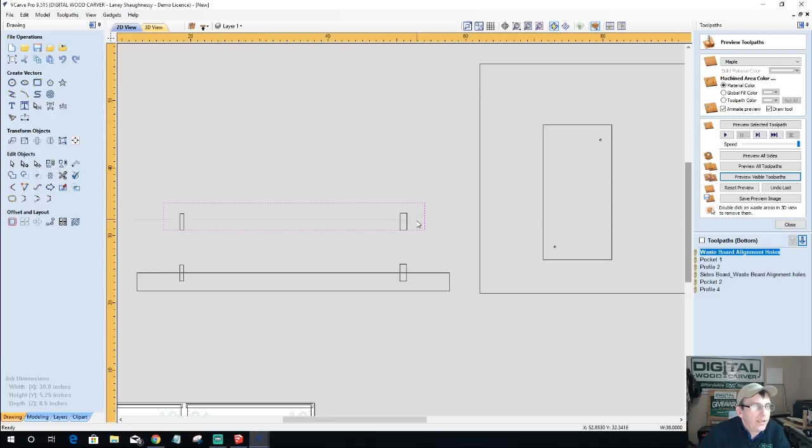So I'm going to take my board once again, and drop it onto those shelf pin holes, in that perfect alignment position. Let me get perfectly aligned here. That's going to align my board up where it needs to be so I can carve the other side.

Any other questions? Any other questions?

And those alignment pin holes are not for clamping. They're just for aligning the board to make sure it gets perfectly aligned off of the X and Y for that position.

No, you don't go through the board into the spoil board. You can, but then you're limited to having to do that other side of that job right then and there on that X and Y. By doing it this way, I could do side 1 today and side 2 three weeks from now. Doesn't matter. I could re-zero out my machine, and I'm always working off a zero.

Those two holes that are getting cut in the waste board are getting cut on the current XY that I set up on my machine at that moment. And since they're in perfect alignment with this, when I drop this board on, I'm working off of that same XY and carving. Okay? All right.

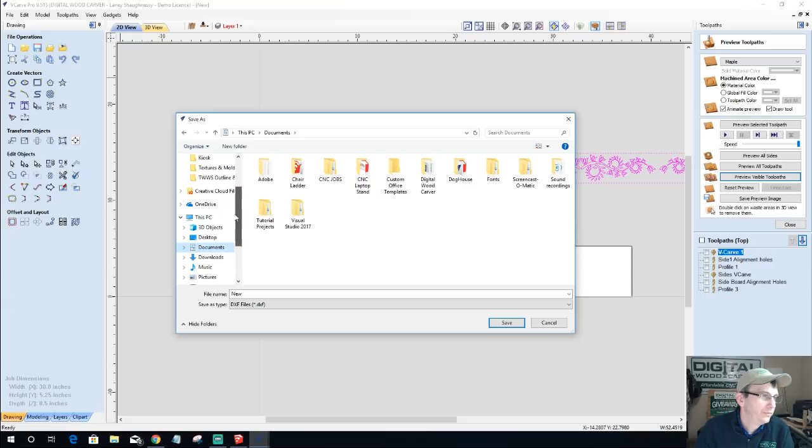I'm going to export these vectors out, and they're going to go into my... oh man, where was that folder at that I was just in? Shoot, can't remember what folder I was in. That's all right, we're going to create a new folder. We'll call this our serving tray folder. I know I just named it, but I don't remember what folder it was in. I'll have to find it later. Ain't got time for that.

Basic tray size, or no, we'll call that front and back. Front and back, basic trays, front and back. And then let me go ahead and just keep things together. Let me take this and let me export that out, and we'll put that as a basic tray. Sides, and of course this needs to be over there, and that needs to be in there as well, just so I have them for anybody who wants them later.

Okay, so now let's go back and let's look at our sides here and think about this. Okay, forget the V carving, right? Let's get rid of the V carving. I can do that now that I've gotten rid of them. I don't want to get rid of my alignment holes though, we'll keep those.

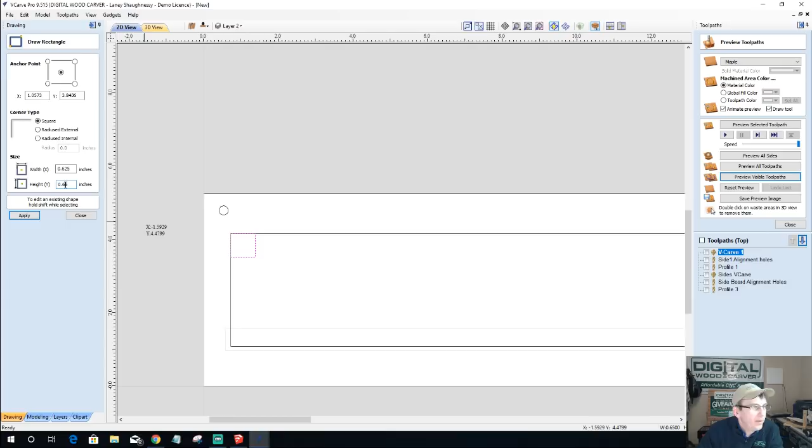Okay, all right, so let's take and let's go with a 0.625 by 0.625 rectangle. Let's go with a radius corner, let's go with a 1/8 inch radius.

Okay, and let's take and make a linear array of this, and I want to go 1, 2, 3. Let's go 4 rows, no, let's go 3 rows, let's not be too greedy. And let's go 14 columns, and let's put a gap of about, let's go a 1/4 inch apart.

All right, let's copy that. Let's go a 1/2 inch apart.

Quit that licking, girl, you are so loud. Lord have mercy. All right.

Let's take and undo that. Let's go a 1/2 inch and 1/2 inch. There we go. All right, now let's stretch this out to right about here.

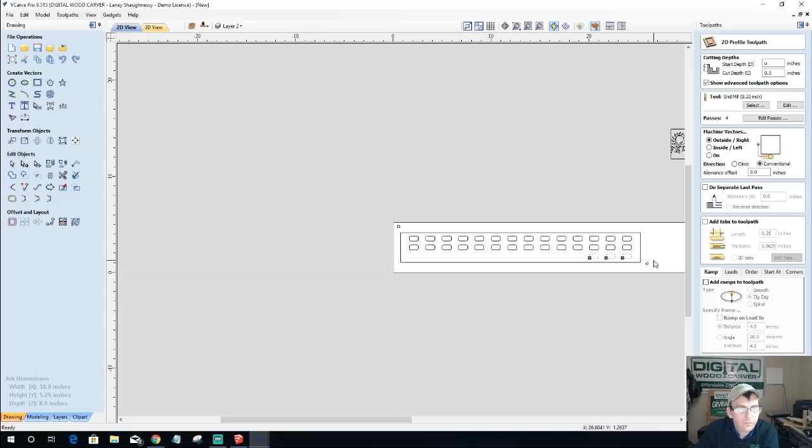Let's regroup. Okay, all right, let's calculate start depth of 0, cut depth of 0.5, 1/4 inch end mill, calculate, reset that preview, preview that selected toolpath.

Trying to delete all these. Double click on your waste areas. Double clicking on your waste area will remove that waste area and everything. Let's see what profile, it's not that profile, it's this profile here. Preview that.

Okay, and then flip to the other side and preview that selected toolpath.

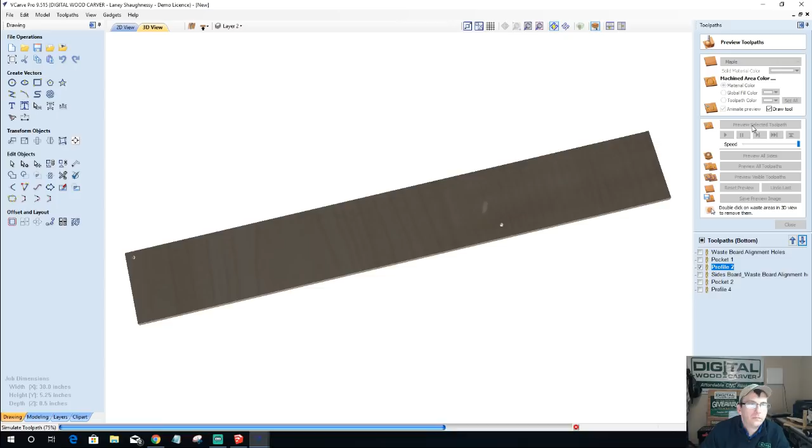But, oh, where's my, wait, hold on, I gotta get my pocket cut in there. Preview that, select the toolpath. Not that one. Stupid. Wrong pocket.

We'll get her. There she goes. All right, let's see if I can get rid of these little chocolate chip Hershey Kisses. Stop.

Now this is a very basic square design, right? But I'm talking about, you could do a little swirly cue like cutout and all, like almost like your monogram, vines and all that stuff. I'm just trying to simulate a cutout. Oh, stop.

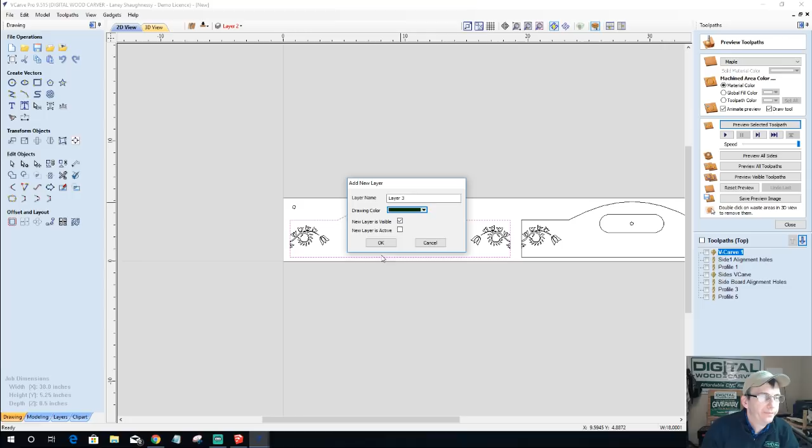All right, I'm going to take just this general shape right here, and make a copy of that to a new layer. All right, we'll make this layer, I don't know, green. Now we better not do green. We'll leave it black. All right, so we're going to turn off all the layers except for this layer.

Now, instead of a handle hole, what about if we take two holes here? I'm going to go half it. Oh, you son of a gun. Make sure the layer you're working in is active. How many times have I said that tonight? I might have to start a drinking game every time I say that.

So, okay, let's take and draw a half-inch diameter circle here, that would be 0.5, Laney. All right, let's close this. Hold down our control key, and let's pull a copy, about like that. Let's take these two parts and this part, with them selected first, we'll group those together. Select this part, and then we will align to center, left and right. Make sure it's centered. All right, now imagine if I drill two holes through here, okay?

I drill two holes through here, and I loop a nice hemp type rope, come in, with a hemp rope, and tie a knot on the inside or whatever, and that rope comes up. And then this doesn't necessarily have to be so high up or what have you, but we could do rope handles instead of...

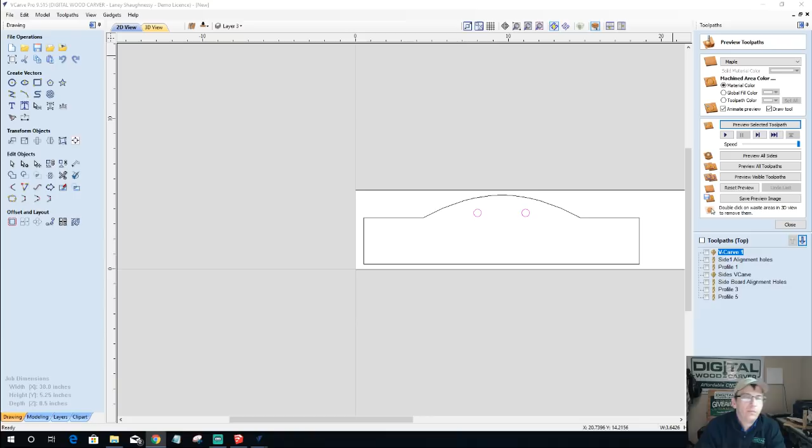All right, ladies and gentlemen, it's 9:54. Let's go ahead and roll out some questions on serving trays. This one, we only did basically one design here, but let's talk about it, and let's see if you have any questions on anything relatable.

Basic serving trays generally run around 24, 24 and a half by 18 inches in size, with walls generally around 4 inches tall. But as you saw with that urban design, they can vary in size. As a basic general design, you're looking at that. But they could be smaller, right? If you don't have 24 inches to do that project, bring it down to 22 by 16, keeping the aspect ratio.

Hey, Steve Carmichael. Hey buddy, how are you doing? Hopefully you're still there to hear me say hi, but it's great to see you. Man, it's good to see you. Excellent, awesome.

No, Dave, we're gonna talk about the quick set tool during this questioning right now, so whenever you're ready to ask that question, you don't have to ask it, we'll consider that being the question to ask.

All right, so it's an open Q&A time where you can ask questions and receive answers. One of the questions buzzing all week, waiting for an answer, is about the DWC Quickset Zeroing Tool. So let me pull up my website, digitalwoodcarver.com, and let's go over to our shop page, accessories, and we'll go down here to the DWC Quickset.

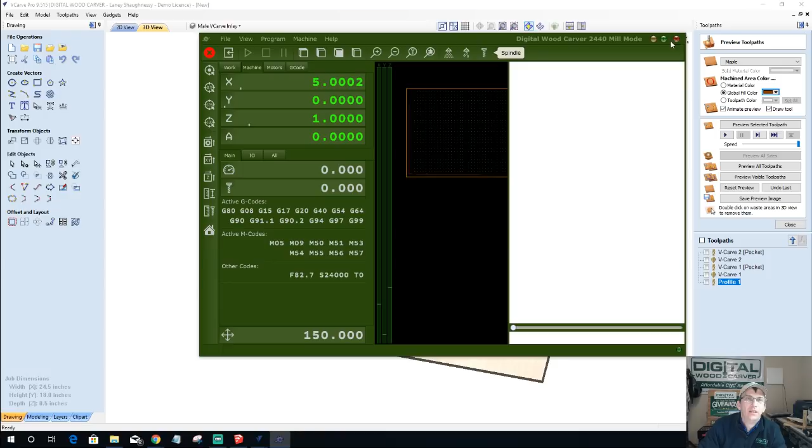He's asking that, yeah Tom, yay you, right? We'll get it figured out buddy. We'll figure out why it's doing that. But no, you were the first. I even went out to my shop and with my Quickset tried to duplicate what you were experiencing.

Couldn't get it. So if anybody else experienced that, here's what it is: when Tom is touching off, after he zeroes out with his Quickset tool, running a G-code created by the DWC G-code Quickset G-code generator, he's running that process with his touch plate, his Quickset block. Once he zeroes out and loads in one of his Toolpath files that he saved with the helical arcs inch post processor, it's a newer post processor in the 2018 9.17 version of Planet CNC, he's getting an error in his G-code line. But if he doesn't use the touch block, he doesn't get the error. That's what I've got to figure out, what that glitch is. But he's the only one, and you're unique, Tom. You've always been a unique kind of guy. All right, we'll figure it out though.

Okay, so for James Coates, how to set up a USB number pad to work as a remote for the mini carver. So we're going to go down to File, Settings.

And in the Settings window, when it opens, let me see first if the settings window pops up here, because let's make sure it's going to capture it. Hold on a second. In the settings window, we're going to go to shortcuts, it's like the 1, 2, 3, 4, 5, 6, 7th option down. Shortcuts. All right, and in shortcuts we're going to scroll down to the jog section. Yeah, it did pop up.

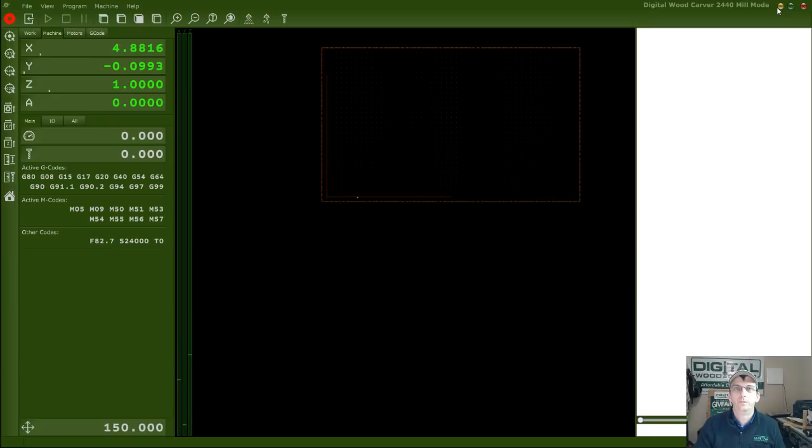All right, hey Wes, what's happening buddy? Wes, sorry we've never had our collaboration, man. I've let you down so many times on that one. One of these days, buddy, I promise. Wes Hamstray, good old friend. We were supposed to do a collaboration a long time ago. Y'all go check out his YouTube channel, he makes some awesome stuff. Okay, let's see here.